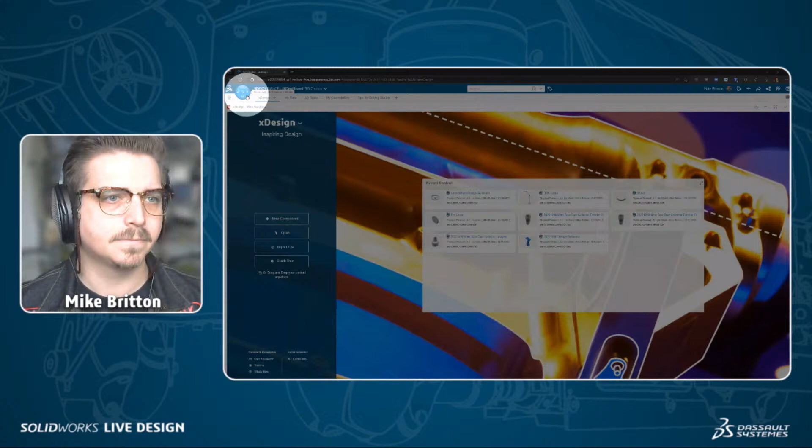I love how you started here—again, this is meant to be tool agnostic, but anytime you go to a new website, a new web portal, a new platform, you're kind of unsure of what to click on or where to start. I think these dashboard areas aren't for their own sake—they're meant to help you navigate your way around, especially if you're new to this tool.

Even that shortcut you gave to the Maker's Cloud link is a great thing to keep in mind—I always say bookmark it, so once you go there you can get back easily. Yeah, these are really good tips to start off with, just to feel more comfortable.

I'm not going to be using it too much here, but I'd be remiss if I didn't point out the giant button next to that hamburger menu. The hamburger gets you dashboards; this one gets you what we call the compass, where I have my favorite apps set up, and this is where you can go to install your desktop things.

But I'm going to be using xDesign—this is the browser-based, parametric CAD package—and I'm just going to open up a new component.

And this is pretty much like you're just making a new component, new file, right? It's all the same, just something new, file new. In this context: new component, new document, new everything. Something new that you will eventually, hopefully, hold in your hands.

And over here on the left, over on our design manager, we have our document name. It says 3D Shape 1, and I'm not going to talk about that today. If you really want to hear about it, we'll talk about it another time.

Sure. But every CAD package that I have worked with, and the number only keeps increasing somehow, despite being SolidWorks. I think you said to me the other day you've worked with like 5 or 6 different CAD packages. I think it's slightly more modest than that, only 4 or 5 3D CAD packages. Okay, 3D, all right, so you're specifying there, but it's still pretty impressive. It's enough to say, right? Like, to be serious for a second, you are worldly in terms of CAD packages. You've used a number of different ones.

Yeah, and the main thing to know is that every CAD package has 3 reference planes built in. If you think back to maybe some grade school geometry, the XY plane, just get my view normal to that. When people say something is normal, they don't mean like our neighbors or how you're supposed to act, they mean looking straight onto it. Yeah, or abnormal like I am.

So you have your XY plane here, and that's just your Y plane going vertically and your X plane going horizontally. A new one for a lot of folks is maybe the Z plane, and we can see in our reference triad again, the Z plane goes upwards in space. So X and Y are 2-dimensional and flat, Z is your third axis that gets out. And because you have a third axis, you can now create a plane across those other 2 coordinate systems, so you have your YZ and you have your XZ. And we can tilt and rotate our views and things like that.

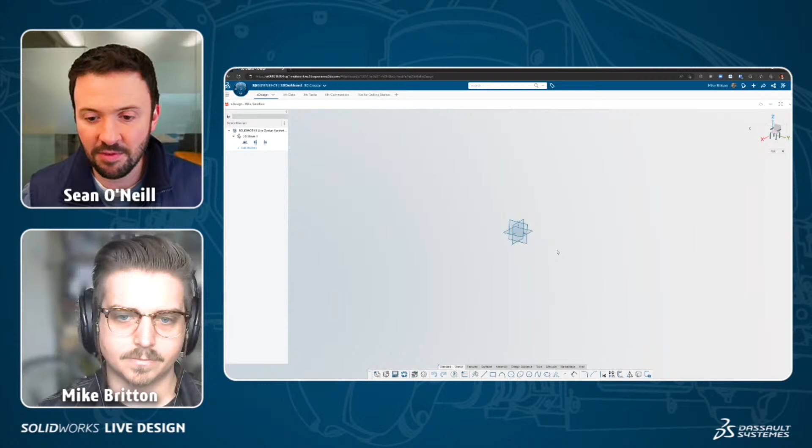Yeah, it's interesting, even different CAD packages, right? Like some will use, for example, the X apps here, I see they're using what we call a Z-up orientation. Different CAD packages might have different sort of directional axes in that way, in terms of how they're coordinated in the 3D space.

But like you're saying, the void that you kind of get thrown into whenever you open up a new file in a CAD package, right? A lot of times we're by definition working on a 2D plane, at least in terms of our devices, our screens. It's a laptop, a tablet, a phone in this case. You could do that with xDesign, but it's kind of giving you an idea of what it would be like if you were actually in that void, across the 2D plane, in that 3D space looking around. So these are all good tips, I think, for how people orient themselves.

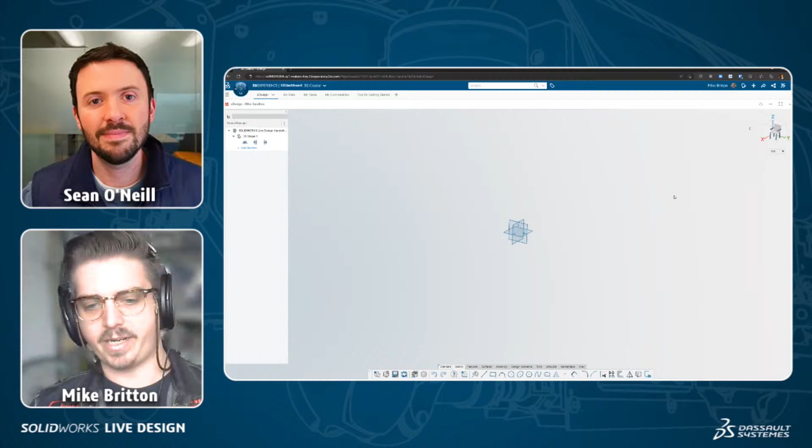Yeah, and you want to design how things are going to look. SolidWorks these days calls them your front, top, and right planes. And you mentioned that Z is up for this, and in SolidWorks, Z actually extends towards you on the screen. It treats X and Y as the sheet of paper, and that made sense in the early days of 3D CAD, where you're starting with a 2D piece of vellum on your drafting table, and that is your X and your Y in front of you. So Z comes out towards you.

So that's why maybe these days we think of X and Y just down on our desk or whatever, and our Z coming up towards our face. It's just rotated around a little differently. And people ask, why is it that way? Sometimes you make a decision in 1992, and that's how I ended up with a little brother. So that's why we have Y up for SolidWorks.

All of these planes are basically the sheets of paper I was talking about that you start with. All 3 of these planes only intersect at one point, and that is the origin.

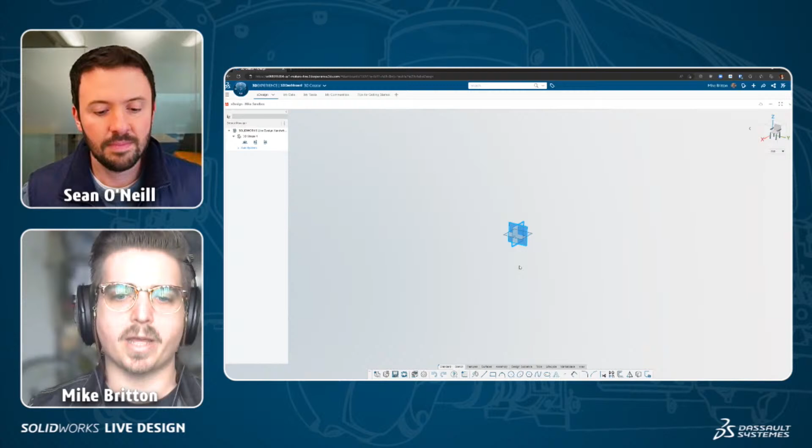If I multi-click on 2 of these planes, we can see—since these are infinite, you can't really zoom in on it—but 2 planes only intersect along an infinite axis. When you get 3 planes into the mix, that's just 3 perpendicular axes that all intersect at one point. So that's what we're going to start with.

That is your origin. That is 0, 0, 0 if you're using Cartesian coordinate systems in your CAD package, bless you. And this is just kind of how we start.

Before I get into the main bit, I want to show a quick demo of how all of this links together before we do our big thing. The part we're doing is usually on the afternoon of our first day of SolidWorks Essentials or the second day. At this point I've usually really beaten people's brains into submission with how 3D CAD works.

I'm just going to right-click one of these planes and click my new sketch icon. That is pulling my view normal to it. Now my analogy for graph paper is really starting to work out because we can see the grid. All I'm going to do is grab my rectangle tool.

Let's talk about the action bar. The action bar is where your actions live. Different CAD packages call them different things—SolidWorks calls it the command manager. It just has different tabs that different tools live on, and the big two are sketch and features.

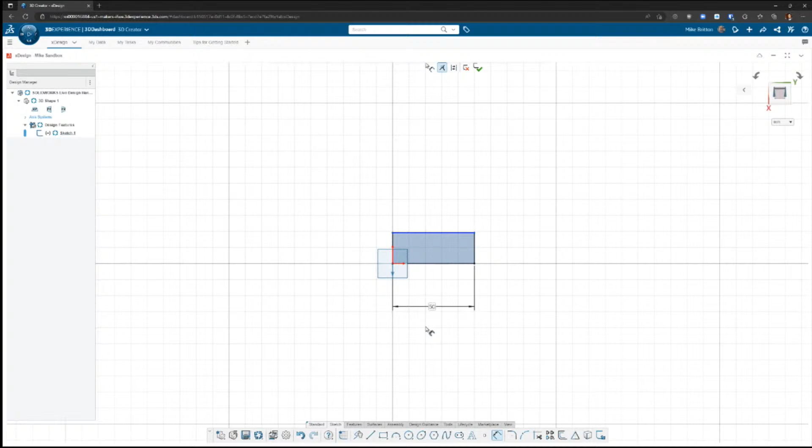Just click once to place one corner—this is set up so I can place my dimensions already, but I can do something weird like this. Then I can come in and put my dimensions on here. I can click one entity at a time, and your dimensions drive your geometry. Same for something else we'll get to later called sketch relations.

So you see that 50 millimeter dimension just kind of yanked that top line out of place. This can be really unexpected behavior for people more attuned to some 2D platforms.

There's a lot of stuff here you went over. You showed the behavior where the CAD package—in this case xDesign, but a lot of CAD packages—will try to get you to anchor to something. There's only one fixed point to anchor to, everything relative to that. But it gives you other cues too, like even the way it shows the rectangle—the only thing that's filled in, a dark blue or purplish color—indicates where it's like a closed volume.

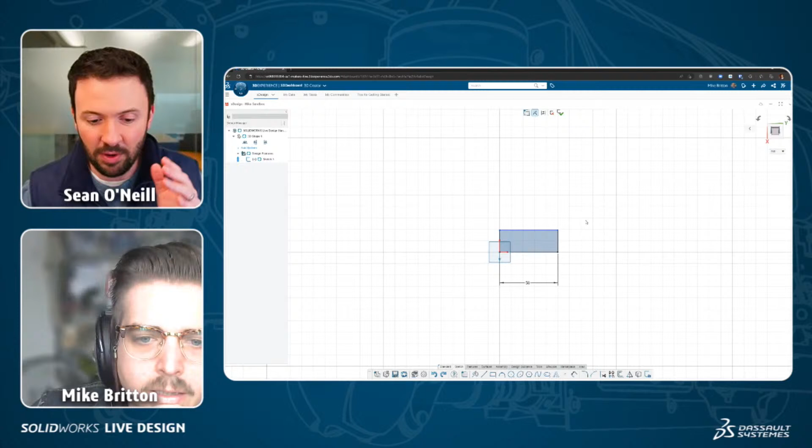But even before you did those dimensions, the rectangle did have dimensions in truth—it had a shape, it was this long and this high. So just to point out, for intro to 3D CAD, a lot of beginner users—even if you're just a beginner with xDesign but you've been using CAD for a while—notice the colors. They went from blue on a couple of these lines, and as you add the dimension, it goes from blue to black. What does that signify?

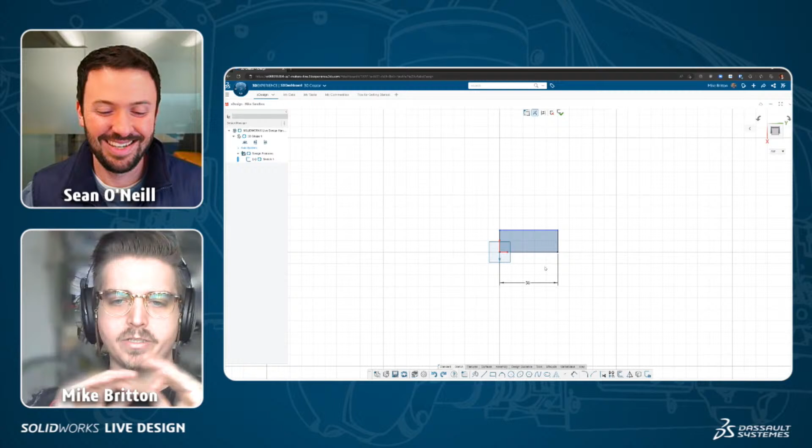That means all degrees of freedom are removed from this particular entity. If we look at these vertical lines, we can see it has a black endpoint where it starts, which means it has definition about this line, but it ends with a blue endpoint. If I click and drag this blue line up here, I can shrink or expand this indefinitely.

That means it has an unrestrained degree of freedom up and down. So if I put a dimension along this line, or a dimension from this line to this line, I can restrain that with a measurement. I'll go ahead and click this line here and give it 35 millimeters, and this is a fully defined sketch.

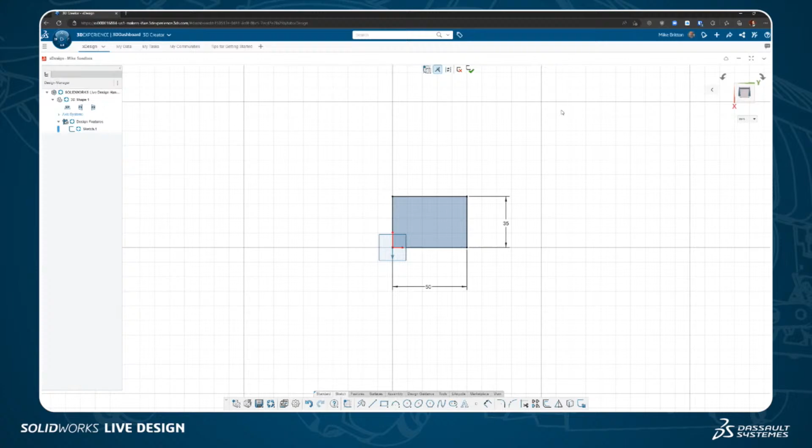All of my points and lines are black. I cannot click and drag anything, it's fixed, all degrees of freedom are removed. There are so many little context clues to look at. Especially when you're getting started, it's about knowing what to look for and which signal it's giving you.

But xDesign has some really good ones. I see my good friend Drew Buchanan saying trust the xDesign process. Definitely, I know Drew, huge xDesign fan.

I think that's also a great off ramp to show that I am doing this in xDesign on purpose, because you don't need a special computer as long as you can get on the web and generate images on a screen of some kind. Your device just needs a battery charge, maybe.

Maybe another prereq, you can use xDesign. I have used xDesign on my extremely weenie Chromebook. When I clock out, I unplug my work laptop from my dock and plug my Steam Deck in, put it into desktop mode instead of gaming mode, and I model in xDesign. I even have a little prop right here. I 3D printed this from polycarbonate on a Prusa Mini 3D printer, and this is just an adapter to get my dust extractor hooked up to my miter saw.

That was all on xDesign on my Steam Deck. So you don't need a Windows computer like SolidWorks does, you don't need a beefy GPU. You can just use what you have and start turning this into something that works for you.

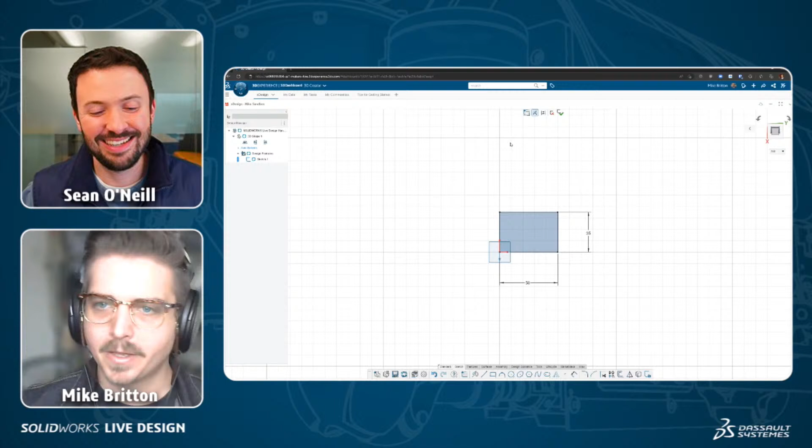All right, I think I've covered everything on this first sketch at least. There's a couple of icons up here and a similar one down here. When you start a sketch in a lot of your CAD packages, you are entering a unique design space. You are going from a 3D design space into a 2D design space, and then back into your 3D design space.

One of the challenges people most frequently run into in the Essentials class is forgetting to exit their sketch. Every package I've used that has sketches, you have to exit your sketch - that's accept sketch, confirm sketch, whatever you call it. Just get out, and now we have our rectangle.

The methodology here for all of these packages is you go sketch, feature, sketch, feature, sketch, feature. You turn your sketches into your features. So I'm going to come over to my features tab and choose this extruded feature. An extrude works the same way as the Play-Doh extruders - you put your dough in, push it through the die, and it comes out in the same shape all the way through. That's how it works.

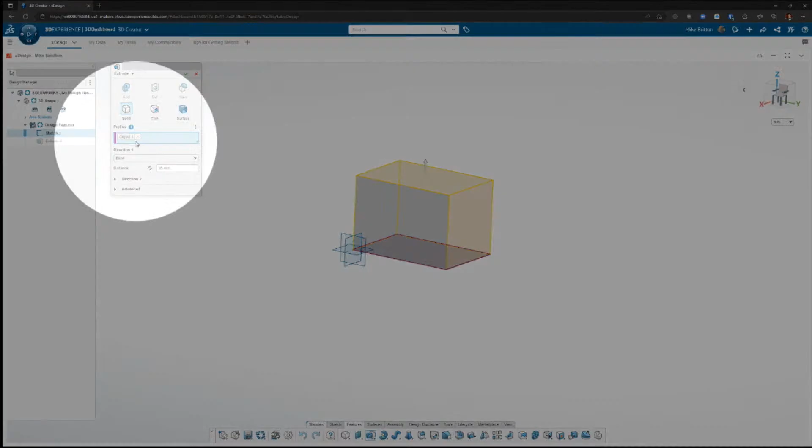I have my yellow preview here, and it's showing where this is going to extrude. We have a lot of super features and things like that I'm going to talk about that are xDesign specific, but all of these have a couple of elements to them. It pre-selected this sketch feature.

It calls it Sketch 1. If I clear that by clicking somewhere else, these blue selection boxes indicate that the software is asking me to grab something. So I'm going to grab this profile here, or I can go ahead and grab the entire sketch out of my design manager, and that'll pull it all out.

I'm figuring, like if you had a sketch like we talked about how the rectangle was filled in all blue, right? If you had multiple contours, or if you had something that wasn't closed, and you wanted to select maybe part of it or all of it and give it a thickness value, these are all different selection criteria that could help you specify what you'd like to extrude and how. So that's pretty useful.

Yeah, and something that's worth mentioning too. Let me do this part, and then I'll hop over to this. So over here we have this box called Direction 1, and this includes our end conditions.

And blind, for anything in this design software, means going up just a certain amount. So it defaults to a 35 millimeter distance for the blind. We can set it to a 50 millimeter blind end condition.

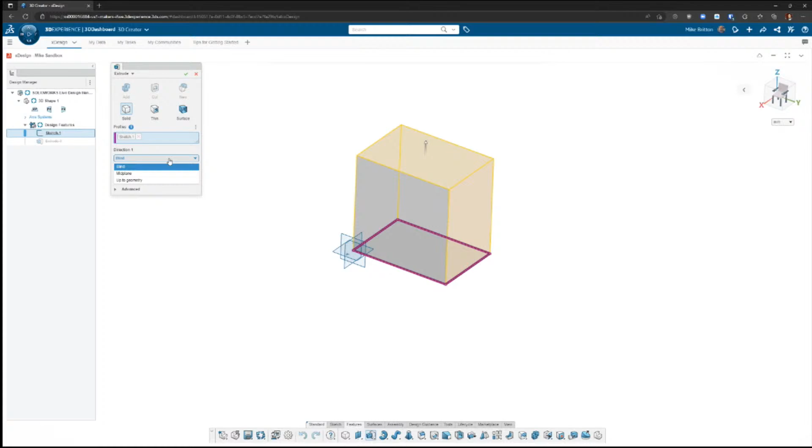We can do whatever. We're going to use a couple of these other ones later on today, but there's midplane, which symmetrically expands about your sketch plane. So if you're making a part that's symmetrical, you don't have to do it on one side then the other, or design half and then mirror it. You can start from the get-go with that.

The other one is up to geometry, and we'll be talking about that a little bit later on. But there's also Direction 2. So if I went 50 millimeters up and wanted to go 15 millimeters down, this is asymmetric. I can achieve that just by expanding my Direction 2 menu.

I'm just going to turn that off, and we get some other fun stuff that maybe you'll have me back again. Who knows? But I'm just going to...

It's interesting, so you're just getting back to the axes and the coordinates and being in 3D space, right? You're specifying, if you say midplane, then you're going in positive Z and negative Z kind of equally. Whereas if you go asymmetrically, direction 1, direction 2, you're specifying how far into negative Z, how far into positive Z you're going with the extrusion. So this is all very useful depending on what you want to do.

Yeah, so these are core fundamentals. And I started on my XY plane. You can start on any plane you want. You design the way you're going to look at and hold the thing in real life.

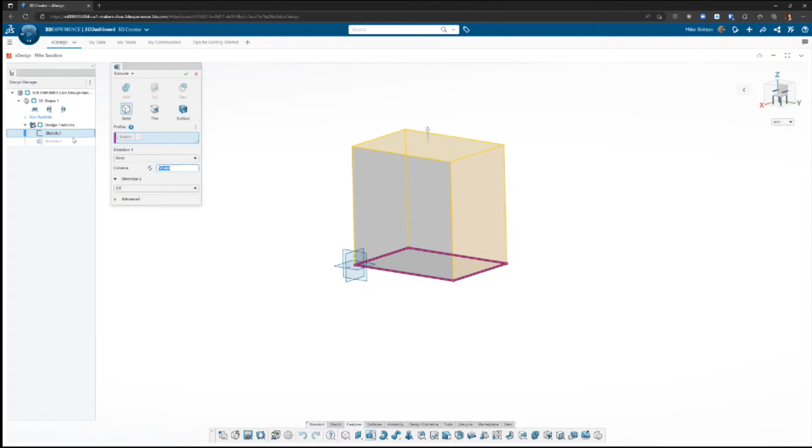So this extrusion vector is going in Z because that is normal, perpendicular, to my starting plane. If I were on YZ, it would come out along X. So that's... I'm getting in the weeds now.

But another thing that people miss is that you want to confirm your commands. This is just a preview. I need to hit my green check for this to turn into solid geometry.

So we have our first shape, and something that I see a lot of folks do when they're either coming over from a 2D CAD platform or a background where they've seen a lot of drawings, or even just Google image search, like what do blueprints look like, you get these really highly detailed views in these drawings, and people try to capture that on a single sketch. And that's a way to make your life very hard.

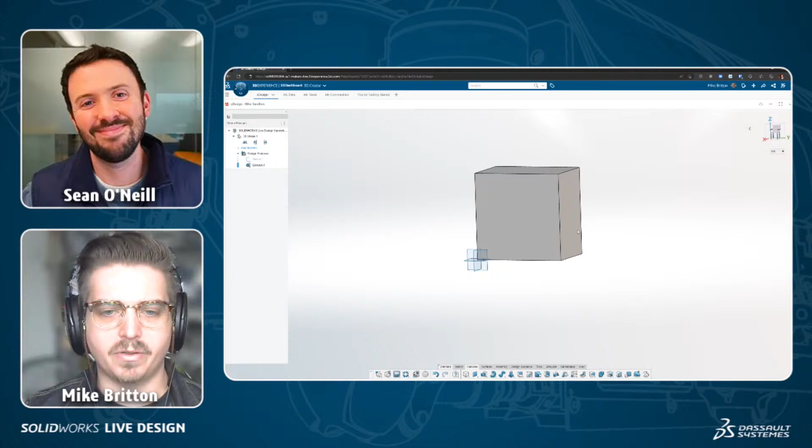One of the best things about 3D modeling is that I have created a cuboid here that is bound to these faces and planes, rather, in the origin. But now I can create a sketch on the face of this. If I just left click there and hit my new sketch in my action bar, this is no longer constrained to my reference planes. This is now constrained to the solid geometry I just made.

And I'll just do something fun. I'll offset entities, and I'll click this box here. We can see that I have a yellow preview giving me an outside offset. If I hit this reverse direction arrow, I can get it on the inside. Just do it 10 millimeters, green check. And now that is referencing this other face geometry to create something new.

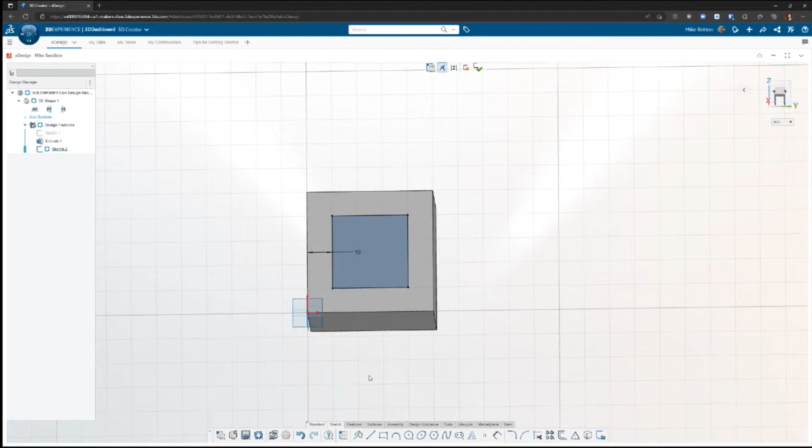So you can kind of self-reference your new geometry all the way through. It's very freeing because now I can turn this into just a little pocket on the side of this.

You hear a lot of people call SolidWorks 3D CAD, or call xDesign rules-based or parametric design. A lot of the things you've shown, whether it's anchoring to the origin point with that beginning sketch, or adding dimensions saying this line has to be 35 millimeters, or this one has to be 50 millimeters, or even doing an offset of 10 millimeters all around from the bounding edges of the face I've selected, this is all rules-based. Anything changes, that rule has to be maintained for as long as it's active.

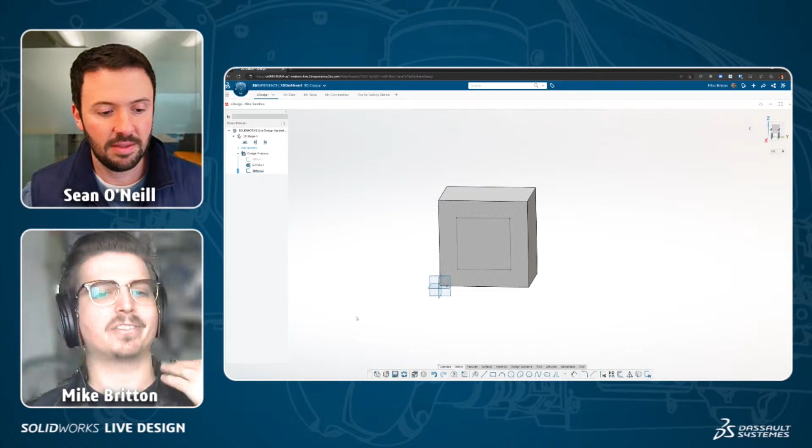So this is a really good tip at an introductory level. Just knowing that every time you create geometry, you have something new that you can reference or put something on, it gets very handy.

So I'm going to come over to my features now and click this expansion arrow on my extrude. We can see we have extrude and extrude cut. I'm going to choose extrude cut. But if I look on this menu, I could have just hit my regular extrude button and gone over to the cut. So if I hit extrude and choose this face, let's make it 10 millimeters, we can see it go out. But if I change it to a cut, these are super features.

These are unique to xDesign among our portfolio. If I choose cut, xDesign knows to flip the direction because I want to remove material. That's it, I just set my distance and green check. Now we have just a little rectangular pocket.

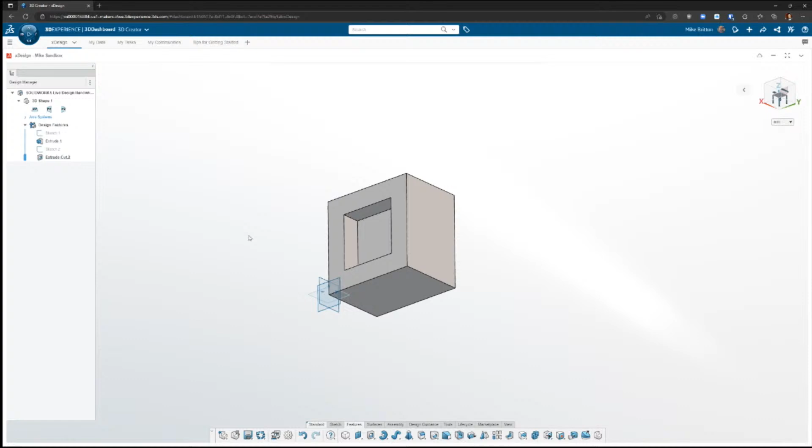So these are just some foundational understandings I want to cover before we get into the more advanced part. This is kind of a sink or swim in SolidWorks Essentials, where things start to get pretty crazy.

You've already made a nice candy holder. Yeah, just two 3D features, all done. Yeah, and this is just goofing around.

Even if I don't have something to design that day, or don't need to poke at a customer's part, every day I fire up SolidWorks or xDesign and do a fast extrude just to keep it up. I'll spend 2.5 minutes in there, sketch, extrude, and call it for the day. Because it's really important for me to keep that muscle memory. And with SolidWorks especially, if you get the muscle memory and keep it, you get extremely fast at it.

So maybe you'll see me at Model Mania World. I was gonna say there's a spot for you somewhere.

Model Mania. But all right, I'm just gonna close out of this part. It's gonna ask me to save. I'll hit save. This didn't end up being a hand wheel, so I'll create a new design that's my real hand wheel. So let's see.

Now, the platform has a bunch of built-in product lifecycle management, so doing this type of thing I see you're making great use of it. Oh yeah, someone in Waltham is having a migraine and they don't know why right now.

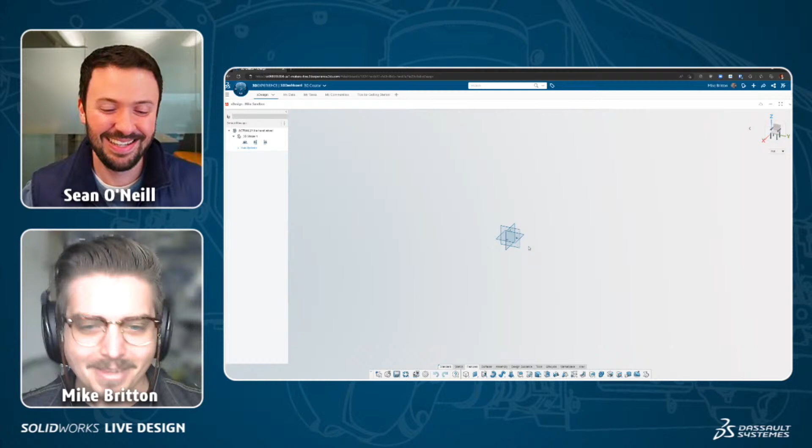All right, I'm just going to get started. We're going to start with our fundamentals, and I'm going to pre-select my YZ plane up here. I come to my sketch tab and create a new sketch.

So what we've done so far was some very simple solid geometry. I am going to start this also with a rectangle, using the same rectangle tool. I'm going to come up to the origin, and I'm already bucking the trends because I'm coming up and to the left. I'll just left click and place it there. And if you look at your cursor also...

Almost all CAD apps that I've used keep you in your tool. It's designed around you doing things in passes. So I'm going to create my rough geometry in a pass, add my sketch relations, which we'll talk about shortly, in a pass, and add my dimensions in a pass. It can be enormously frustrating for new users who don't expect that. So I hit my escape key in xDesign.

I use some other stuff in SolidWorks just to get out of my tool. The tool next to my rectangle is my arc tool. There's a lot of different arcs we can make, but I'm going to create a 3-point arc.

We can see from this icon how it anticipates you placing the clicks. I'm going to place one for the start point of my arc, another for the end point, and a third one for the zenith of my arc. I'm going to click that, and just like I can with my solid geometry, I can

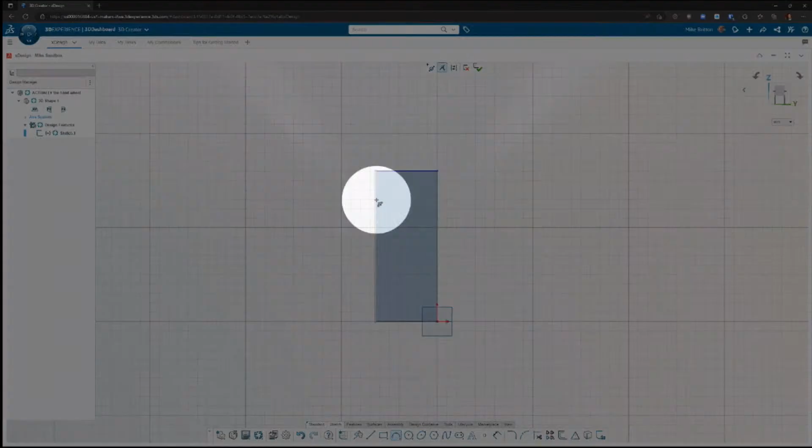get my sketch geometry to self-reference. So I'm getting a hint along my cursor with that little circle around it that this geometry is going to be coincident to—it will be on this line that I've placed. I'm going to click once to place it, click down for that other point, and left click again out here for that zenith.

So we can see that we have this big profile here that's colored in, and this guy over here did not get colored in. We're going to use another tool called Power Trim, which is either down here, or I can use something called mouse gestures—I'm just holding down my right mouse button, and I moved my mouse a little bit.

They might be called something else in xDesign, but I'm a SolidWorks guy. I'm just going to come over to my trim/extend right here, and now you can see I have a little pair of scissors next to my cursor. Hold my left click down, and as I pass through a line that intersects something else, it gets rid of that intersection.

And yeah, that's the power trim. I wish so many other programs had power trim. So essentially, it's recognizing with that fill-in now that this is a singular closed contour that can now be extruded—it's a closed 2D volume that can be made into a 3D volume of some kind.

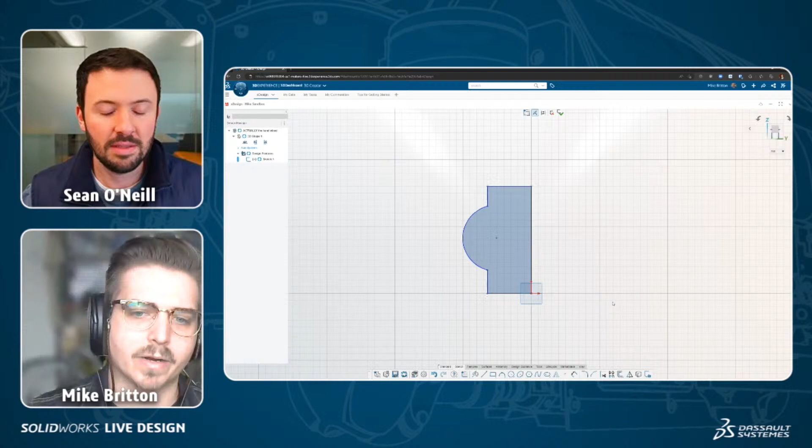Exactly—in our sketches, we are creating cross sections, and that's exactly what this is going to be. I am going to do something a little weird though, and I'm going to right click. This whole stream's about to get a little weird.

I'm just going to right click this vertical line here, and I'm going to right click and hit this top left icon, and that converts my sketch geometry from a solid line to what's called a construction line.

You can create your own reference geometry inside of your 3D space or inside of your sketches that you're not really going to be turning into a solid part. This is going to be important for a couple of reasons that we'll see shortly.

The first thing this has done is remove my closed contour—that's one behavior that's different from solid geometry. It also has some mechanically interesting elements because this is not going to get extruded like we did with our rectangles in that last part.

This is going to get revolved about a central axis. So you can think of it like a pottery wheel or a lathe—if you use lathes, it just brings the same profile all the way around a central axis.

So I'm going to come in and grab my dimensions here. Because this is going to get revolved about this central line, I can start doing some pretty interesting things with my geometry. So if I left click this vertical line here and I want to dimension it relative to this central line, I've got this dimension here.

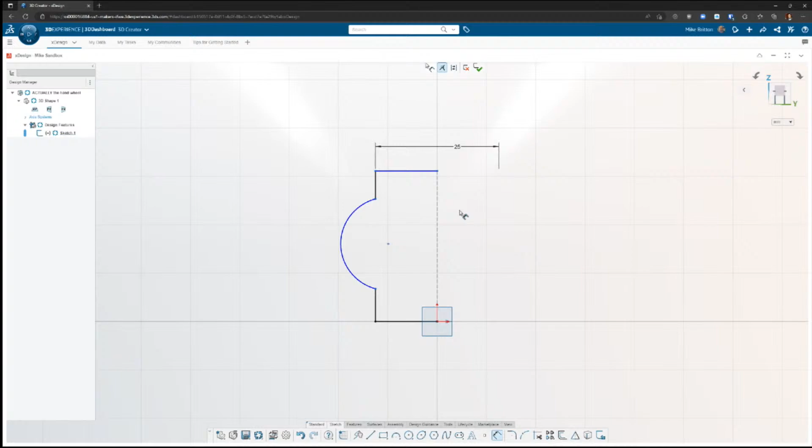Ah, cool—it's interesting. I think people are so worried to mess up sometimes when they start a new piece of software. They're worried, like, if I mess something up, then I won't be able to get back to where I was, or I just don't want to be wrong. So in this case, what seems best is just to try to make sure that your geometry is proportionally accurate about itself.

Because the software will kind of do the rest for you with that first dimension. We'll get even further along in this part, and I'll demo some of the weird stuff I do, like exaggerating in my sketches, and then letting my sketch relations and dimensions snap everything into place.

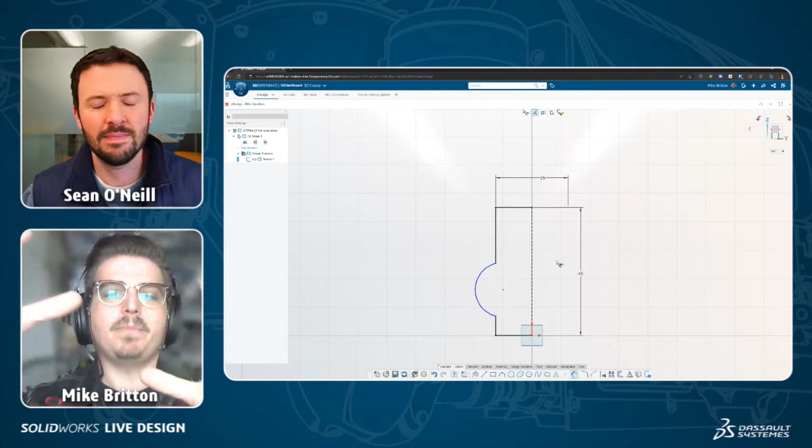We talked earlier about how when you have your cursor on something, your CAD app is grabby on there. If you try to sketch too accurately, you can end up accidentally getting relations you don't want, and then you get a lot of yellow and red on your screen. It feels like the software isn't cooperating, but really what it's trying to do is bring the rest in for you, make sure it's picture perfect. That's how I operate, and we'll see that happen soon.

I'm going to grab this upper leg here, and this guy is 10 millimeters long. We've got some weird action happening here. I'm going to do a dimension from this endpoint to this endpoint. Because I have this width figured out, this height figured out, and now this height figured out, I'm going to shrink this down just by adding a dimension, and that will pull it up for me because all of these things are already defined.

Just click to click. This guy's only 16 millimeters. We've got that. Now I'm going to grab my vertical here, hold my shift key and click this guy there. Oh, not quite what I wanted.

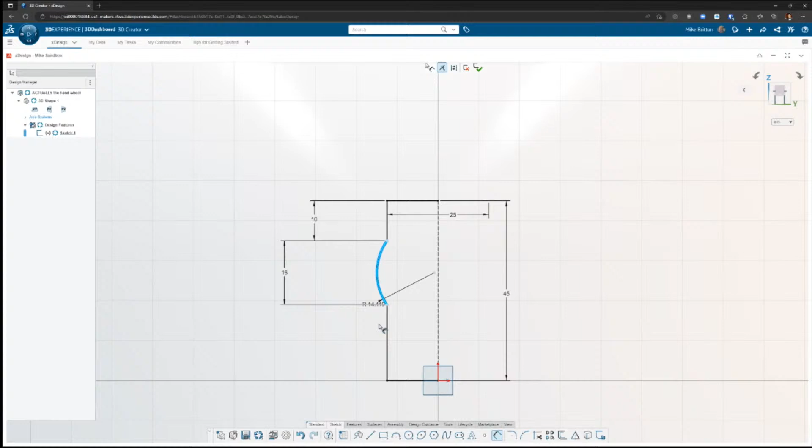How is it? Okay. There we go, I was able to—okay, check this out. I'm going to get back into my dimension tool, and when I grab this arc here—where did that even go? That's so fun, I promise you I practiced my picks and clicks. Is it?

You trying to get the outside of the arc? There we go, mentioned? Yeah, there you go. So SolidWorks, the picks and clicks are a little different, and I get on autopilot. We can see that when you dimension to an arc, it defaults to the center point, because when you're doing your shop layout, milling, turning, all that, it defaults to the center point of that arc. All I'm going to do is grab this point over here, and that gives me the distance from this outermost point to this vertical. It'll be 4 millimeters.

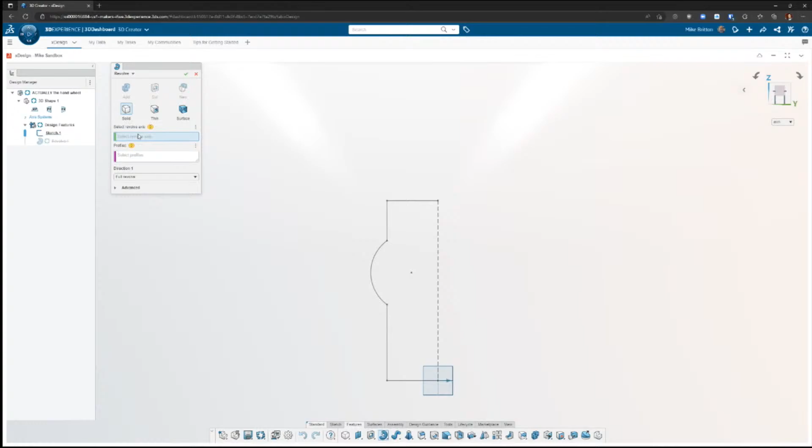Cool, and that's it for this sketch. We now have a closed contour, and I'm just going to confirm this. If I come back to my features and hit this revolved feature, it's first asking for a revolve axis, and that'll be this construction line that we did. For the profiles, I'll just click and grab all the way through here. It thinks for a second, but that's exactly what I want, so I can green check that.

Something that a lot of people—to your point earlier about people worrying about getting things wrong—if I want to adjust a dimension now that I see it solid, I can right-click the sketch, hit Edit Sketch, and change any of these, or throw in some sketch fillets here. I'll change that to 5 millimeters, and tell it to solve again.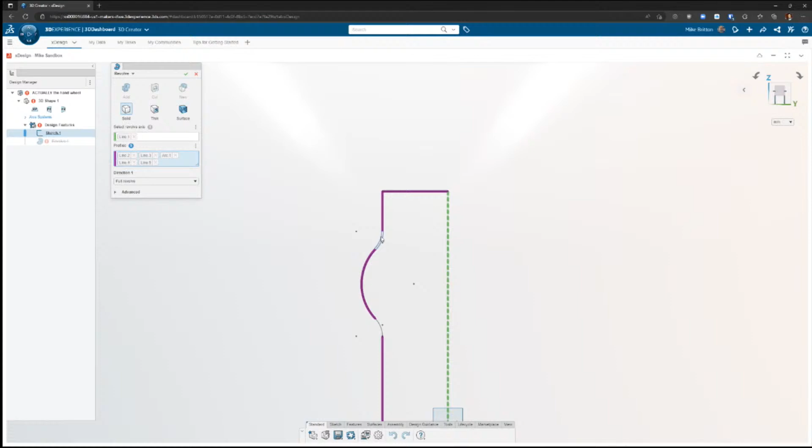I think it may have been—oh yeah, because it lost that tangency. All right, there you go. I just have to edit my revolve feature now and grab these two new little sections here, and we're back in. I like to apply fillets for that very reason, but we'll do that later.

Okay, I'm going to start picking up the pace a little bit. I'm going to create another sketch on my YZ plane.

This time, I'm going to start off with a line here, and that V for vertical gets applied to it. I'm going to convert this into an infinite construction line that is vertical here.

I'm going to come over to my straight slot tool in my sketch, and I click once for one center point, click again for the other center point, and then click a third time for the thickness there.

And I'm just going to go on a dimensioning pass. I'm going to relate this center line to the top of that solid geometry, so you can reference solid geometry inside of your sketches. 6 millimeters there. Center point of this slot, we're going to once again do our radial diametric trick for 170 millimeters.

Again, I'm going to grab my thickness here, and this is going to be, here we are. Endpoint to endpoint. Grab that.

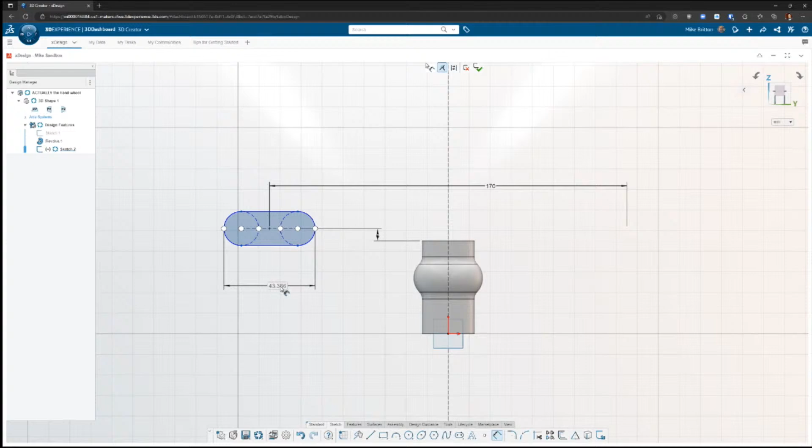That's such a cool feature. Essentially, it's just allowing you to change whether you're going to the min, max, center. That's really nice, especially for touch devices, that you can just click your dimension and get back in there to relate things.

Now, instead of getting one thick closed body here from a revolve feature, I'm going to bring this all the way around. So I can green check, come over to features, one more revolve. Choose your axis, choose your profile, 360 degrees. We're good to go.

It's starting to look like the thumbnail of the episode. Now we just got to get something from over here to over there, which is achievable.

I'm going to create yet another sketch on my YZ plane. And over in my design manager, I'm going to right-click these sketches to get them to show, because I want to relate to some of the geometry we have in here. I'm going to pop into my line tool, and I'm going to start this from this center line here that's showing up from my two sketches that I've done earlier.

I'm going to come out horizontal. What I'm going to do is go out and come back in, and I'm going to create something called a tangent arc. That means I'm creating an arc that is tangent to the line that started it, and it drops me back into my line tool. I'm going to do yet another tangent arc, then go horizontally out from there.

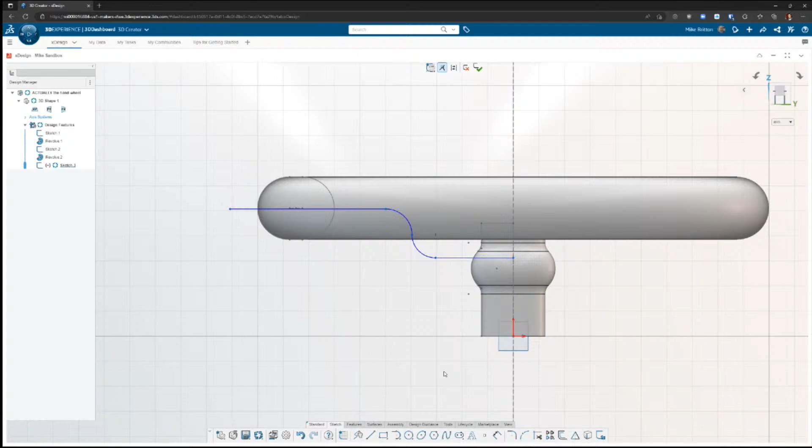So I mentioned sketch relations driving our geometry, and this is the part where that really comes in. I'm just going to move this out of the way to show what's happening here. If I come to my View tab and hit Hide Show and just hit my Sketch Relations icon, we can see that xDesign is implicitly adding a lot of relations: horizontal, tangent, tangent, tangent, horizontal.

Now what I want to do is get this endpoint coincident to this midpoint, and this center point coincident to this line, and then get a few dimensions on there. I like to do relations before I do my dimensions because things start to get a little wibbly.

If you click any of these relations, it highlights the entities that have that relation. So these two arcs are tangent. If they weren't, I could add that relation. But all I'm going to do is left click one arc, hold my control key and left click the other, release my control key, and we can see all of our different relations that we can add. So we have tangent, concentric, equal, co-radial, fixed, or added dimension. Set these to equal. Nice.

That was one of the questions in the chat, and there are a number of ways how you might want to link dimensions and where you might want to do it. But that's certainly one way. If you're going, of course, you'll dimension these soon. But essentially you're establishing through a relation, not a dimension in this case, that these two arcs should be of equal value. So that's very cool. So that answers that question.

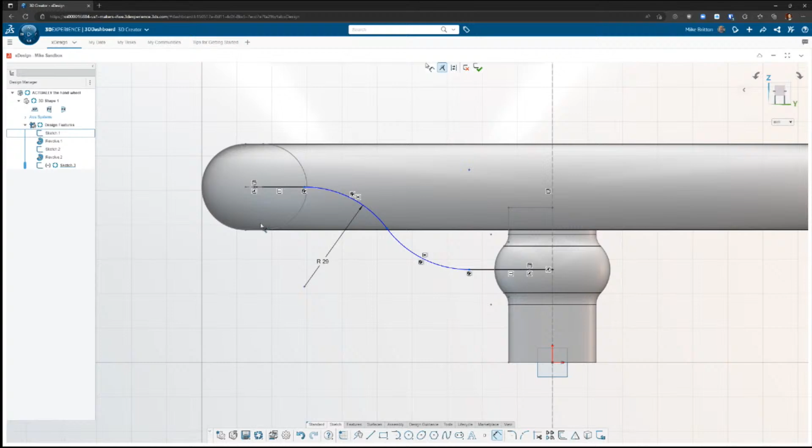Something that can be easy to lose track of is what is a leader and what is not. So it did some weird stuff, and it looked like it kicked stuff kind of all over the place. Be calm, it's okay. I'm just going to grab from that center point to the start of those arc segments, and set this to 55 millimeters.

Before we move on from this section, I really like some of the things you showed. One of the things I wanted to call out is that you're showing 2 previous profile sketches for your revolves. That's how you're getting them to look familiar, because they are. We saw them sketched, and they aren't the active sketch, they aren't editable, but they are referenceable, which I think is an important distinction. That's how you're able to get those centers of those 2 regions. I thought that was a nice utility.

And then that last dimension you added, the 55 dimension, we can see that there are different senses of a dimension. Between 2 points, you can get this horizontal dimension. It could be an angle, or the sort of straight normal dimension.

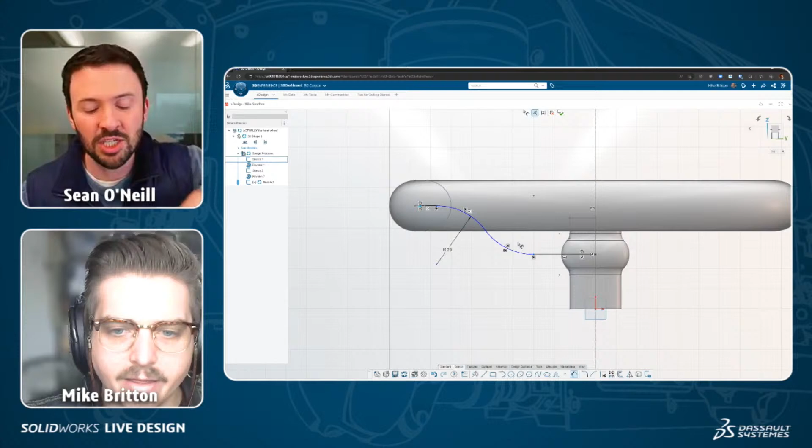Yeah, that's great, I'll get back into that. So we have our linear dimension here, just straight line to line. If I come out to the left, I can get a vertical dimension, and you can see that it goes to a lighter gray. That may be hard to come through, but that's because that is a driven dimension. The dimensions for that endpoint and the top and bottom horizontal sections are determined by other sketches already. Or if I come up, I can get my horizontal dimension.

Yeah, that's a great call out. And this sketch here is what loses the majority of my students. I swear it's not because I'm a really bad AE, it's because these can be easy to hear and hard to see, especially when you're following along click for click. I really like that this is just going to be here forever, because the majority of our viewers are probably not trying to follow click for click like you do in a classroom. You can come back and create this on your own time, anytime, with our dulcet tones guiding the way.

I'm going to confirm this sketch, and this sketch is also weird for another reason, because we're not going to turn this into solid geometry yet. We're going to combine this with another sketch.

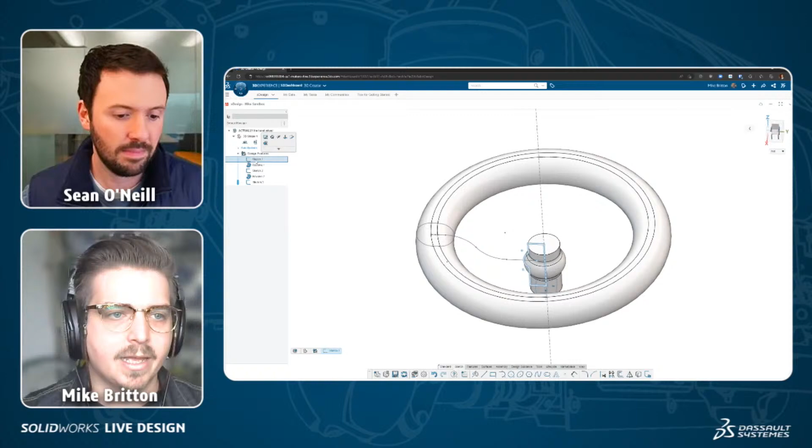One of the powerful things about linking this to the existing sketch geometry is if I come back and edit sketch, let's not do sketch 1, let's edit sketch 2. If I say, oh, this 170 millimeters is actually not great, I'm going to make this 185. I green check that. Look at that, the sketch that we just did still follows through to the established center point.

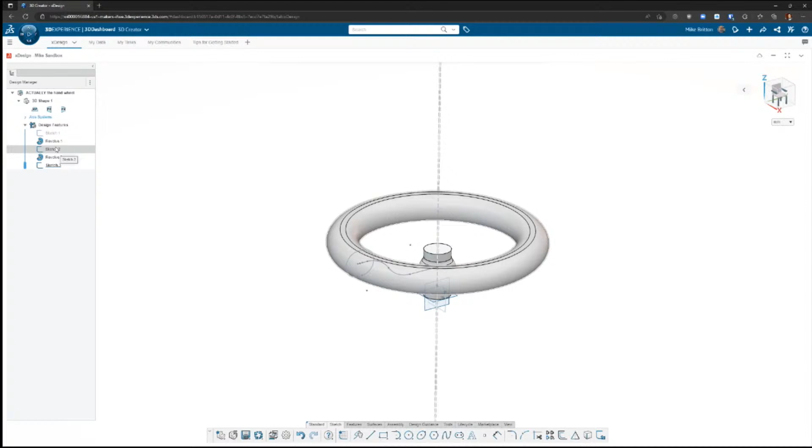And that is something that SOLIDWORKS xDesign does really well, that a lot of other 3D CAD applications are, I'll generously say, somewhat less gifted with. But with those done and those references established, I'm just going to right-click these sketches and hide those. I'll leave this guy here.

Something to note as well is that you can rename your features, which is great, because Revolve 1, Revolve 2, and all that are not very handy, especially if somebody else needs to see it. If I left-click Revolve 1, press F2, I can name this Hub. I can name this Rim.

And that'll stick through, that'll stay when I save, like I do right now. You can just view that anytime. It makes edits in the future easier. I'll open files I was working with last week and be like, what ding dong was doing this?

Yeah, terrible. I was going to say, it's good for someone else that might be editing your files, and that someone else might be you in 2 weeks. Yes, me, I'm the ding dong.

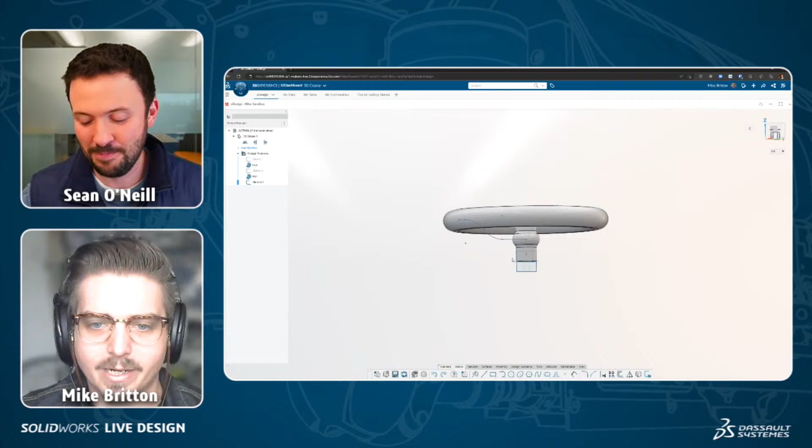Okay, so we've been doing all of our sketches so far on this YZ plane, but we're going to come around to our ZX plane. I've lived in the States my whole life, and for whatever reason, in CAD and design, it's always like my Z axis.

If that slips, say it differently. I've noticed that too. If that slips, I'm not really sorry, but at least there's an explanation. Yeah, another one of my abnormalities, I guess.

So I've left this last sketch that we did showing, and now I'm creating a sketch on my ZX plane, and I'm going to create an ellipse, using this tool here. An ellipse is kind of like a circle, but if it were Looney Tunes, if you could squash it. So I click once for my center point, and I'm going to be careful to keep that H coming along my line for my horizontal. I click my thicker axis, the major axis, and then click again for my minor axis.

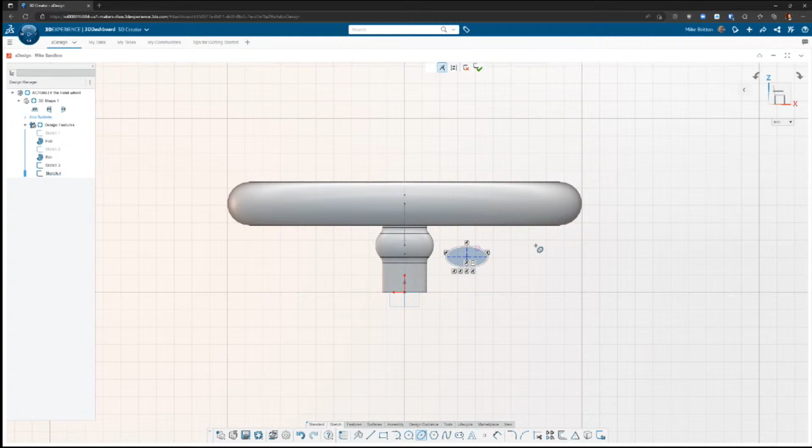This is looking a little cluttery, so I'm going to come back to my view and just turn off my sketch relations again and just trust in the xDesign process. This is what I talked about with being caricatured, because I'm going to center this profile I'm drawing here on this line, but in order to avoid accidentally clicking or referencing this edge or something I don't want to, xDesign will default to the endpoint instead of the line.

I'm doing this off to the side, and I'll get back to normal, and hit my dimension tool, and I can use these horizontal construction lines. SolidWorks 2023 Service Pack 1, I think, is getting construction lines in your ellipses, so bless — that's going to save me infinite clicks on all of my future Essentials classes. This is just 14 millimeters wide by 12 millimeters tall.

And that's it. So our sketch is underdefined, but our geometry is determined. I can't twist this, but I can place this, and I have a center point on this particular piece of geometry. I'm just going to use my middle mouse button to rotate my view very slightly, because I'm going to add a relation between the horizontal section of the line from our last sketch and the center point here.

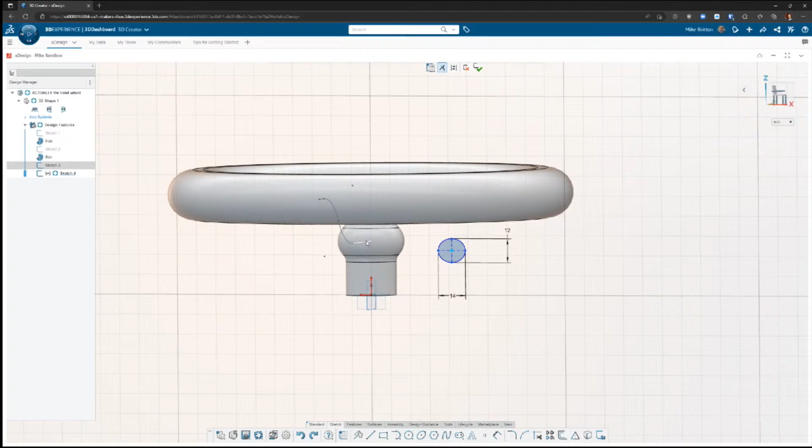The Make Pierce relation, as you saw, is a lot like coincident. So if I put a coincident relation here, it also locates that contour. For this particular feature that I'm designing for, though, I need to use this Pierce relation for reasons that are out of scope for introductory CAD. But what I'm going to do is use this profile that we've just made and this path to create a solid sweep feature.

So I'm just going to green check out of my sketch, and I'm going to hit my sweep here. The sweep, once you see these options, is kind of intuitive — it needs a path, and then it needs a profile. If I were creating train tracks, I would just create the cross section for the track, and then create one or two sketches that are just the entire circuit of that.

So my path is going to be this path here — oh, it didn't grab onto the rest of it. I'll just grab sketch 3 to save myself some trouble. We're going to be like that today. I highlighted it differently. All right, I can click 4 times, I'll live somehow.

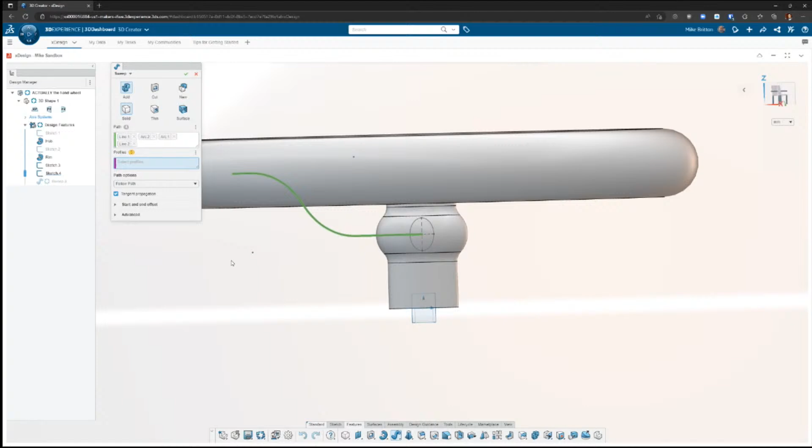And then for path, I select all of this from one sketch, and I'm going to select the profile from this other sketch, and we can see my preview and how that's bringing things along. I'm going to leave all of my options at default. If you want to hear me talk about the more advanced sweep options, you can sign up for an advanced part modeling class, or you can find me on the street, because I will talk to you about CAD.

So this is interesting. You went from having, very visibly, two bodies, two pieces of material that were disjointed, not together. And now, right, it looks like through that sweep feature you just did, you've basically joined them into what looks like one complete, almost fully assembled hand wheel, right?

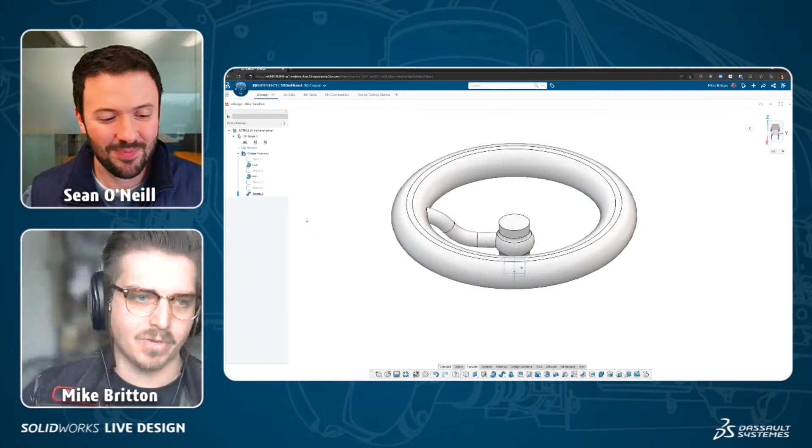Yeah, we're getting there. I don't know what this is called in xDesign, but I know that's my rollback bar in SolidWorks. You can use this if you're like, oh, I actually wanted to do something before this and edit something. You can click and drag this up to wherever you want to make those edits, and then drop it back down, and now things are stacked up.

It's kind of like your design time machine. If you wanted to do something before this, I can just bring it up. That's a direct differentiation between this type of CAD, parametric solid modeling CAD, versus sculptural stuff, like Blender. Even in Blender it can get a little hairy undoing and getting back in your design history, so that's a really important differentiation. When you create your first prototype, you don't have to create the whole part now. You can go back and edit and inject things where you need them to go.

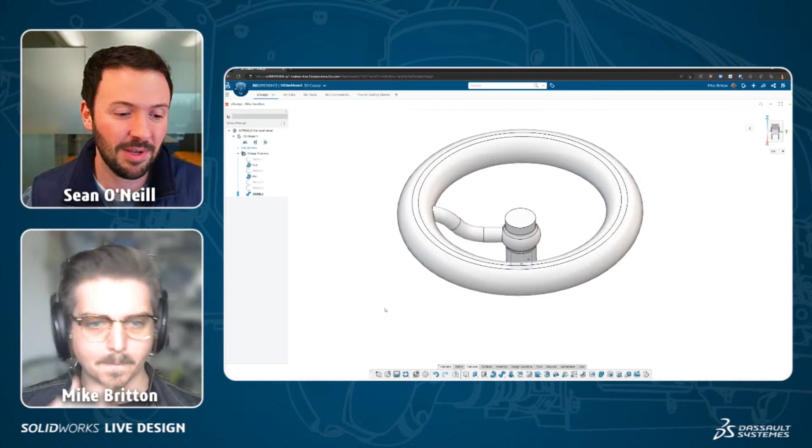We talked earlier about it being kind of funny that the last stream of the year is about these very basics, these fundamentals. The month January is named after the Roman god Janus - he has two faces on his head, one looking forward, one looking back. So it's always looking both ways, and that's why it's the first month of the year - a new start and closing up the past.

Very cool. All right, so we've got a bunch of our stuff done. If I were to actually hold this in my hand, it would be very flimsy - it would break nearly instantly. So if I'm going to create more support structures, instead of doing two kind of janky sketches and another sweep, I'm going to create a circular pattern.

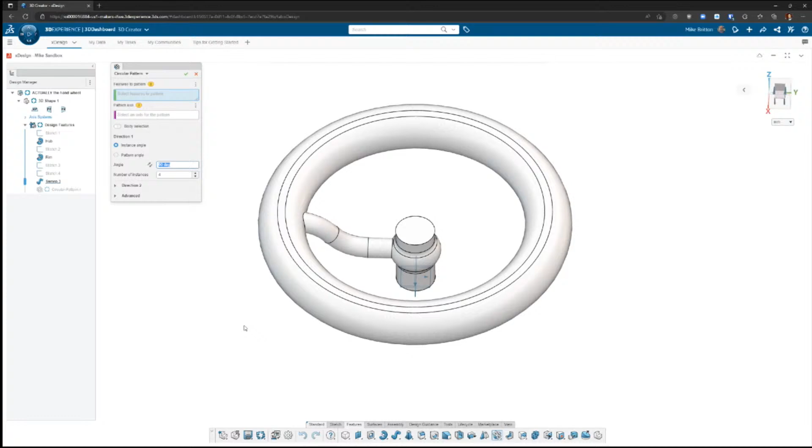So right here we have our linear pattern. If we open it up, we can see our circular pattern. Some packages call this a polar array, which I think is a very cool science fiction-y name. I'll put in an SPR for that to be renamed from circular pattern to polar array.

So it's asking for features to pattern, and there's a toggle here for bodies - let's talk about that real quick. A feature is any of the things in here. These are parametric feature-based modelers, so our geometry is secondary in the hierarchy to the features used to create it. If we chose a body selection, that is an enclosed volume - that's this whole body. If I clear that and select a feature, like this rim or this sweep we did, it's just getting that part. So your features are categorically different from your geometry, but they are related.

All I'm going to do is drop this down to 3 instances. The number of instances in xDesign and SolidWorks patterning includes the original. My pattern axis is going to be about the center. This is giving me 3 instances 90 degrees apart from each other. I'm going to do pattern angle at 360 degrees apart.

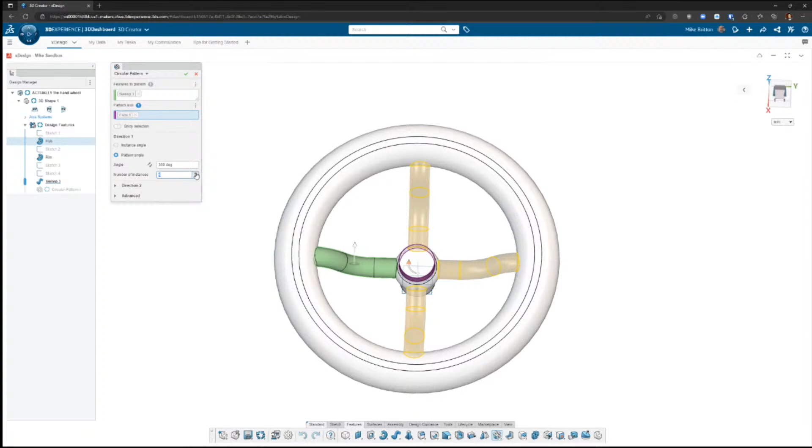So, 360 degrees total, subdivided evenly by 3. We can kind of arbitrarily increase the number. Like 7 spokes across 360 degrees is hard for you and me to do, and we'd need a dividing head in the shop to do it. But for xDesign and SolidWorks, that's a non-issue. So, 3 instances at 360 degrees, and I can green check that.

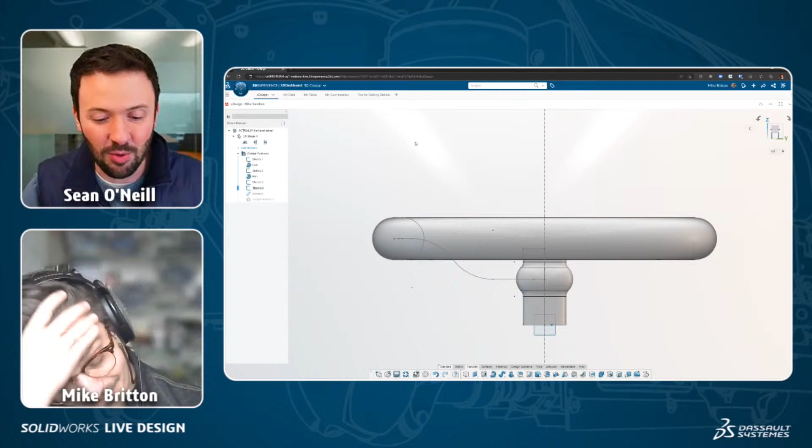And now we've got something reasonably close to our finished product. It's cool to see that all the spokes have that same quality at their beginnings and ends where they have a bit of overhang. That's one thing that comes up in CAD a lot - how do you make sure it merges properly and you don't have this weird, ugly knife face or sliver face that doesn't completely end. That was one reason, other than having those center points there, the way you made the profile for the sweep really came in handy, because it ensured it would go fully into the material of the handle portion and the hub portion respectively.

I've got a manufacturing specialty as a SolidWorks application engineer, so I already work with people doing CAM frequently on parts they're getting from customers using who knows what. I'll happily do another live design session on fixing files people send you, because again, it's a huge topic.

I started with surface modeling with Rhino 3D, and that prepared me well for editing models, because non-manifold faces isn't something in regular SolidWorks AE vocabulary. It's just not a problem anymore.

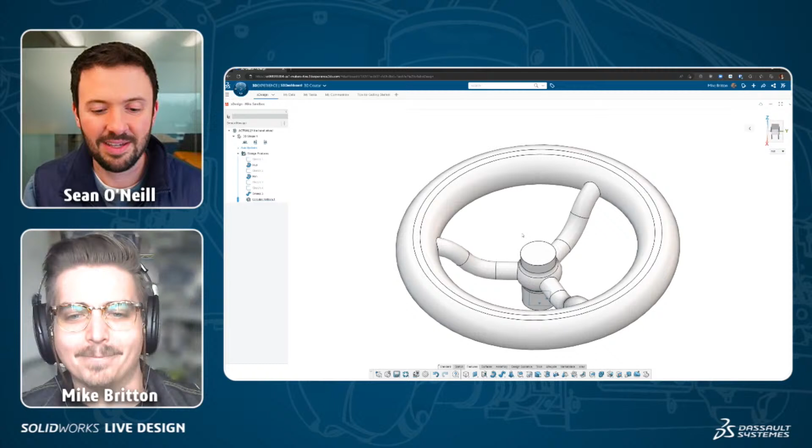Okay, so we have our spoke patterns, and I'm going to take a moment to talk about controls too, because when I first started doing CAD, it was really hard to keep track of where I was in space. I would oftentimes do things where I'd end up way out in space, totally lost. How do I get back somewhere I can look at?

My F as in Foxtrot key will zoom to fit, and that's true in both SolidWorks and xDesign. So now I'm looking at this with some orientation. It's the spacebar in SolidWorks, but the G key in xDesign to choose a face and grab your view selector. For a lot of folks, working with free orbits is challenging and not intuitive, and it does take some real work to get the hang of it.

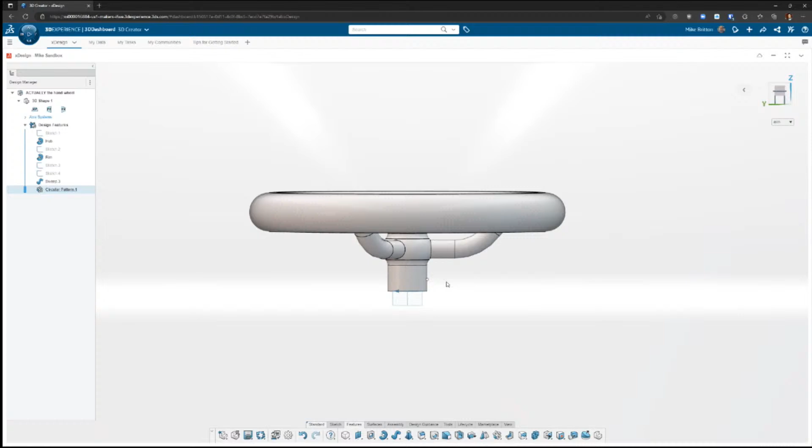Just like learning a brand new video game. So you press your G key, and now you can choose the view you want to work on. Or if I'm looking at a part and want to be normal to a particular face that's not on one of the views, I can right-click a face and hit this icon here, my normal to, and that'll bring me right to it.

So those are handy controls, and you don't really even need a mouse to do this. I'm using a stylus on my Chromebook when I'm designing there, or on a tablet. So if you're stuck with a trackpad, you can still work with xDesign - it's really not going to leave you hanging on that front.

All right, we've done that fun stuff, and we're nearing finishing touches. I have a handful of fillets I'm going to put in here, so let's grab my fillet tool. We've talked about how your workflow is sketch, feature, sketch, feature, sketch, feature - that's true for sketched features. The circular pattern, fillets, another one called shell, things like that - these are applied features. You're still inputting parameters, but you don't need a sketch to do them, more or less.

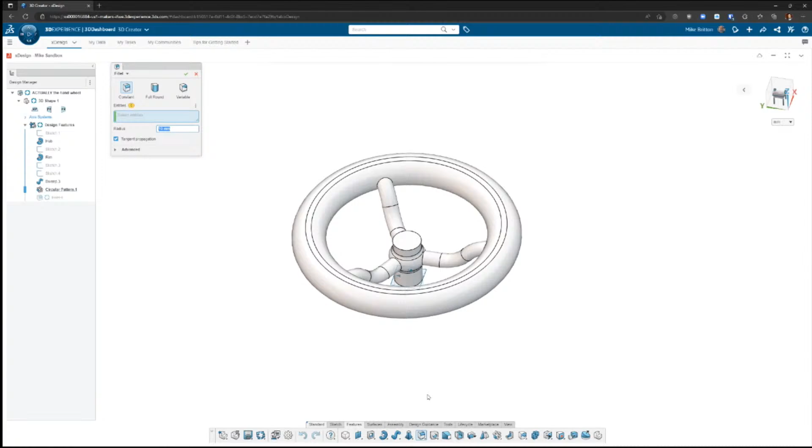So I have my fillet dialog box shown up here. I'm going to grab this edge here, and it's giving me 0.85 millimeters. That's not quite what I want - I'm going to grab 3 millimeters. There we go, and we can see kind of how fillets work.

And I could even grab this gumball here to arbitrarily click and expand to, one of my favorite games is to see how big of a fillet I can generate here. Don't let the preview go away. Yeah, we can almost get an inch on this.

And it's cool too that the way the edge was created in 3D, it sort of splits it down the middle. But since you have tangent propagation checked by default, it kind of knows to go along the other side of that. Nope, that way madness lies. I'll get too far into the weeds if I start talking about split cylindrical faces.

I'm going to clear this option out here though, and here we go. In xDesign and SolidWorks, we get some selection managers. This is design assistance for selection here. I'm going to click that, and we're going to see what this gives me. We've got a couple of suggestions involved here.

Here we go, we can see the faces that it's giving me. So it's giving me some of those, but it's not giving me the ones I'm looking for. You can fool around with these, and we can select that and add those.

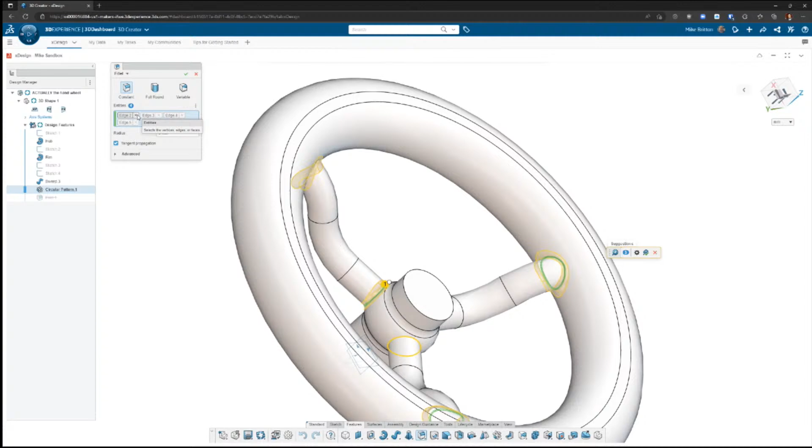But the idea, right, is you went in there with the motive of trying to speed up your processes. And I guess if I'm watching this, I might be thinking, okay, there are 3, and it's easy enough to rotate, but sometimes there are far more than 3.

So if the system can automate, and you don't have to go with its selection if you don't like it or if it isn't exactly according to your intent -- but a lot of times, even if it doesn't get each one, it may speed up your process, and then maybe you have to get 1 or 2 extra ones. At least it saved you maybe 15, 20 clicks. So it's a good thing to be aware of, and it's right next to your cursor.

Yeah, especially when you're designing for things like additive manufacturing and casting, and there's a lot of fillets you have to start applying, things get weird.

The logic behind the way xDesign does it and SolidWorks does it are a little different. In SolidWorks, you click one and then go to another. But if I click that guy, and then I click this one here, and then hit my suggestions, it usually starts pulling in even more options. Let's see what all -- it's not grabbing them here. Who said machines should learn?

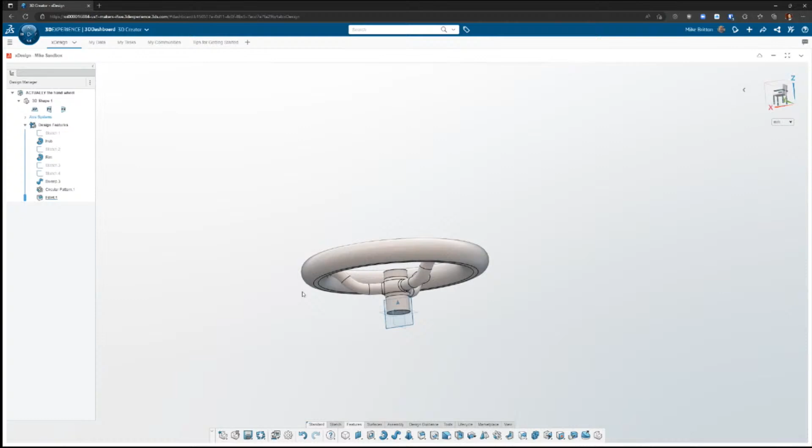All right, we've got our clicks in here, and that's going to have them all applied. Cool, so we have our fillets applied. And last, we're going to apply a chamfer.

A chamfer serves a lot of the same purposes as fillets for those of you who are new to things. A fillet is a rounded corner, a chamfer is just like a clean edge break. They're by the same icon down here, choose chamfer. Also, if you come up here and use your drop down, you can go back and forth between fillet and chamfer. Oh cool. Yeah, and we have a lot of different kinds.

The default is a 45-degree chamfer angle because that's really easy to set up in a machine shop. But we can also do distance. If you remember your grade school slope calculations, y equals mx plus b, it's programmed deep inside. You have your rise divided by your run. Your run is your x-axis, your rise is your y-axis.

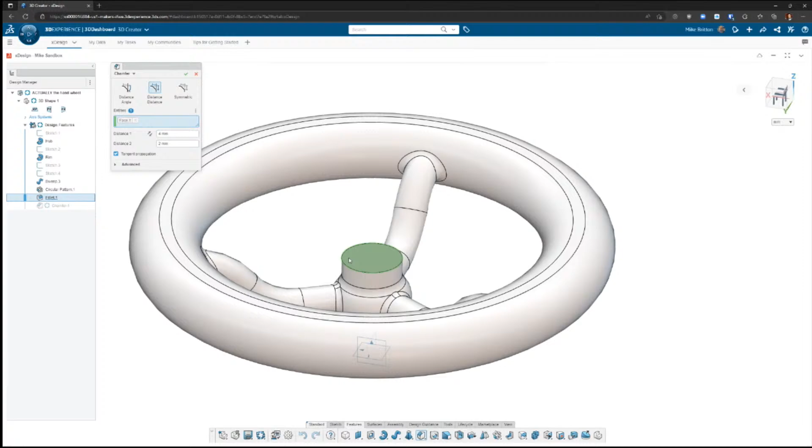So my run here is going to be 4 millimeters, and my rise is going to be 2 millimeters. I'm going to apply it to this face here, and we can see how that applies. So if it were symmetrical at 2 millimeters it would look like that, but we're going to do it a little off-center, give it a slope. And there we go, cool.

We have our fillet there, or our chamfer there, rather. Nice, yeah, how are we doing on time? Because I can just save this and hop over to the one that I sent you earlier that I ran those results on.

We're about 16 minutes over an hour. I mean, but I think with the scope of the course, and the helpfulness, especially long term, whether you're getting into xDesign or, like you've mentioned several times Mike, if it's your first time getting into parametric sketch based 3D CAD -- even if it's an hour and a half, I think that's a great use of an hour and a half. Great, for sure.

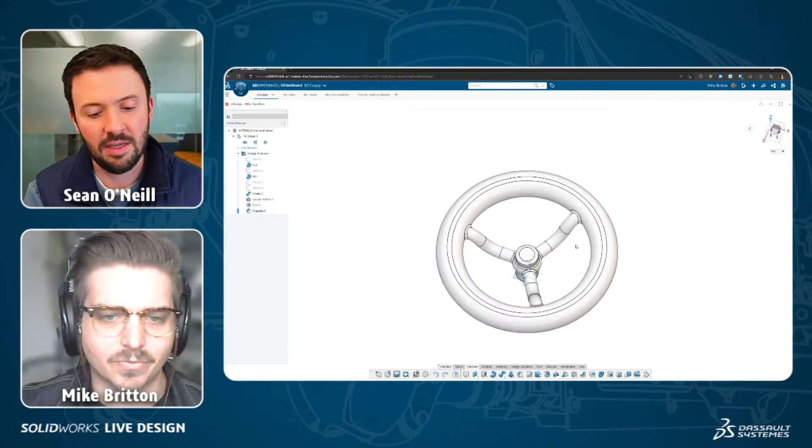Because this is where it starts to get really nice. If these hand wheels frequently need extra leverage, how could I ever get a cheater bar onto this wheel if it gets really stuck? So I'm going to create a sketch on this tiny flat face that we created with our chamfer. I'm going to right click and hit my new sketch button, and it draws me in normal to it.

I hit my C button for my circle. I can come down here for it, but I'm just going to place the endpoint of this circle. Actually, I'm going to do a line instead - a construction line first, so I can be really fancy. I'm going to do it from one edge there, get out of the way, horizontally, there we go, to this other edge next to it.

I'm going to right click, turn that into construction geometry, and constrain this horizontally to my origin for what I assure you are very good reasons. Sometimes coincidence acts a little funny - great, it acted funny in the way that I needed it to. Coincidence is like two things touching, but it can also be two things not touching, like sharing an axis or sharing a face.

It's kind of getting back to how you can see a line - what is the definition of a line? They would intersect if the line continued, right? So it's a good thing to bring up, and I also really like what you're doing.

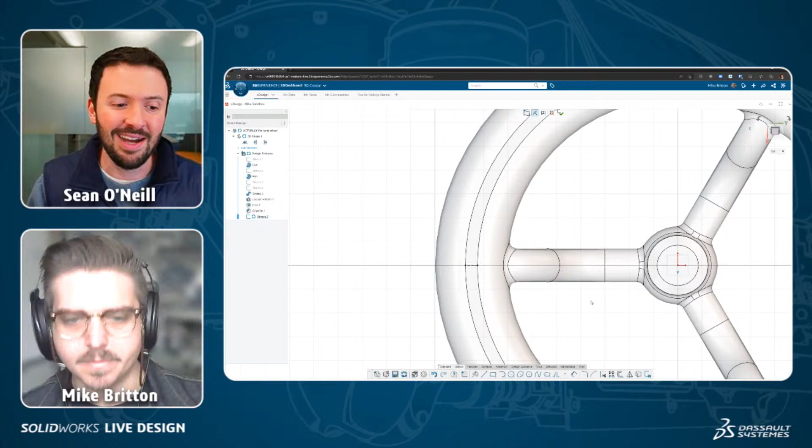I think that's a great tip. Yeah, I'm very big on making my own construction geometry. Yeah, me too. Obviously, whenever I touch a customer's part - if you use more construction geometry than I do, you're impairing yourself, or if you don't use as much as I do, you're clearly unsophisticated. It's only the amount that I do that's right.

But construction geometry is so useful because sometimes if the powers that be make edits up our design manager or feature tree, sometimes if you make a big enough change, it can lose those things. That's just kind of about how SolidWorks keeps track of where everything is, or xDesign keeps track of where everything is. So frequently adding construction geometry can make errors or warnings that show up later a little bit easier to manage, because you have one degree less abstraction of what you've got and what you're trying to fix.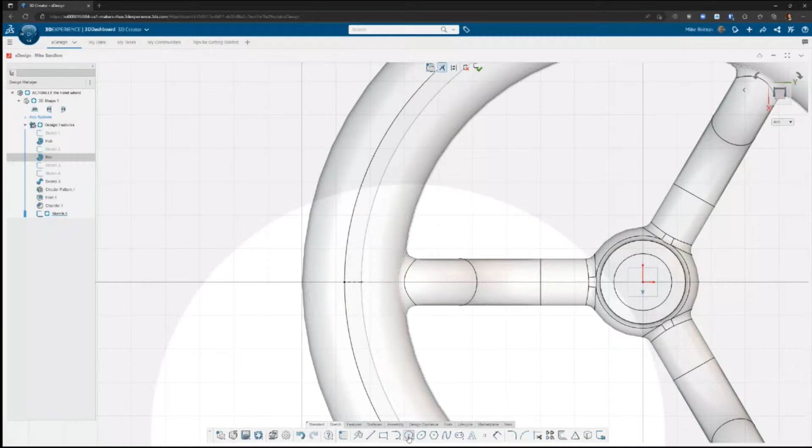All right, so we have our center line here. I'm going to go ahead and create a center diameter circle. Because this is a really tiny line, I tell my students all the time that I use SolidWorks like a grandma because I'm zoomed way in there. Especially on small stuff like this, I'm going to hover over this line, and we can see on my cursor feedback that I have a circle around it now for coincident.

But as I get towards the middle, that'll transform into a triangle, and that triangle in xDesign means it is the midpoint. SolidWorks behaves a little bit differently - it shows you an explicit point. In xDesign, you've got to kind of uncover it. But once you've got it, I can click there, and now with this dimension showing, I'll just type 20 millimeters. My sketch is fully constrained. I can confirm my sketch.

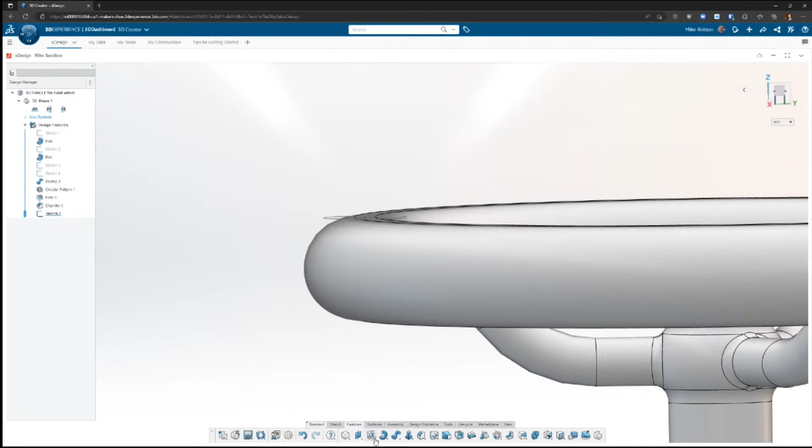So I want to extrude this up, but if we take a look at our sketch here, we can see that it overhangs the circular edges of this rim. So I don't just need to extrude this up, I need to extrude this down as well. So I'm going to come back to our extrude, grab this profile here - let's see, this guy comes up, how far do you come up?

6 millimeters. But then on the downside, I'm going to do something different. So we're going up 6 millimeters, and then in direction 2, I'm instead going to use up to geometry, or actually I'll use up to next. And you'll see that it's going all the way through this body here.

Since this sketch is set as up-to-next, no matter what changes I make, because it's constrained to the center of that rim, if I make it wider, the sketch will follow. If I make this rim taller, the end condition will follow too. That ensures I don't get any of those tiny slivers.

There we go, it stays right. You're future-proofing it so that if the shapes change in any way, it still works — you still have enough overhang to merge the extrusions together.

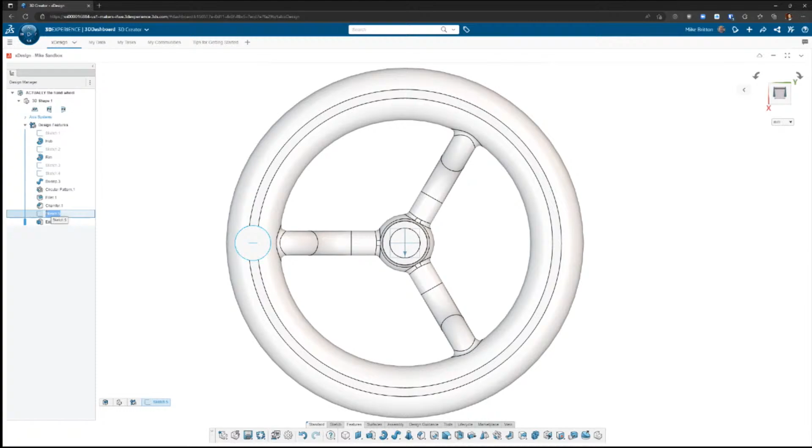Yeah, and this is about maintaining design intent, which is such a hard concept to convey. For this knob, there are a lot of ways I could place it in space. I could place the center point 85 millimeters from the origin, and that would happen to land on top of my rim, but it wouldn't follow any edits. What's important is that this knob is on top of the rim, period — it has to relate to that rim.

And that's just something that once you get it, you've got it. It's hard, and you can hint at little things here and there, but if you abstract it away from CAD, it's just setting the proper rules.

No, I think that's the geometric example of that — a really good point. That's a great way to explain it, I'm going to take that into class because I don't have kids, so that was never going to come up for me. Never going to come up.

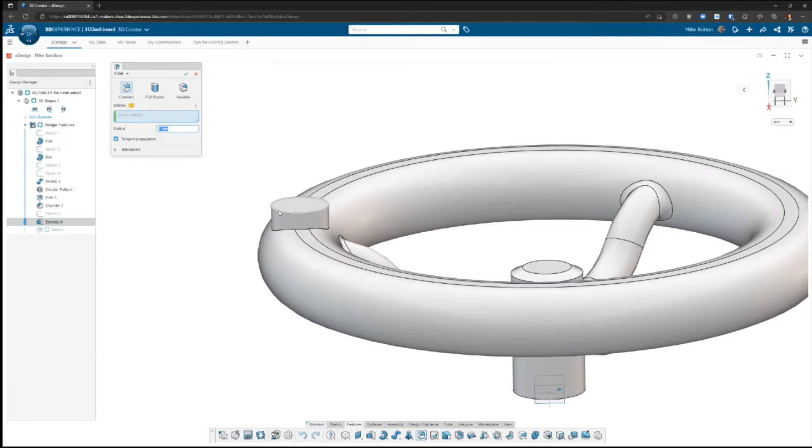I just changed my radius to 1 millimeter. I can choose an edge to fillet and it goes all the way around, or I can choose an entire face to fillet, and that fillets every edge on that face — that can save you a lot of clicks. I didn't do that earlier because I didn't want xDesign to try and add a fillet there. All right, we've got our final two elements here.

I'm going to create one more sketch on this part to make a hole so you can actually attach stuff. This is going to be a 9 millimeter hole. I'll hit the C key, and if I hover on a circular edge, you can see it has woken up my circle center point.

So boom, we're fully defined in there. I can green check, press S for shortcut, hit cut, and grab that profile. Because the important thing is that it goes all the way through, I'm going to set my end condition to through-all one way. That just makes it go through the entire bounding box of your part.

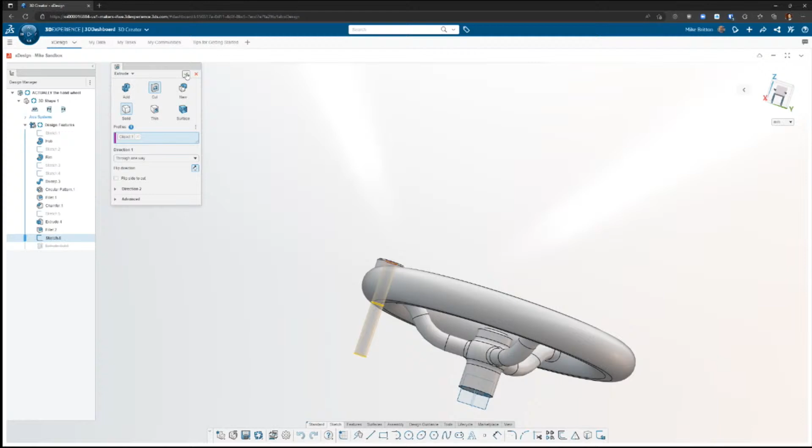So be careful when you want to use that — there's nothing underneath in this case, but if there was, you'd need to be careful. The last thing I'm going to do is create another sketch down here so we can actually get the part on something. I'm going to create a circle.

And tragically, I prefer to design in millimeters. We could change that anytime over here, but that changes for the whole document. If you, like me, also design in metric, because I don't need drill sizes with letters on them...

I can mix and match my units. This is going to mount to a 1/2-inch shaft with a D hole or D grind on it, so I'm going to set this to 0.5 IN. That gives me 12.7 millimeters. Oh, that's a good tip. It does the conversion for you for that dimension.

Oh, yeah. And if anyone ever gives you guff, imperial is based off of metric. We didn't know how big an inch was until World War II.

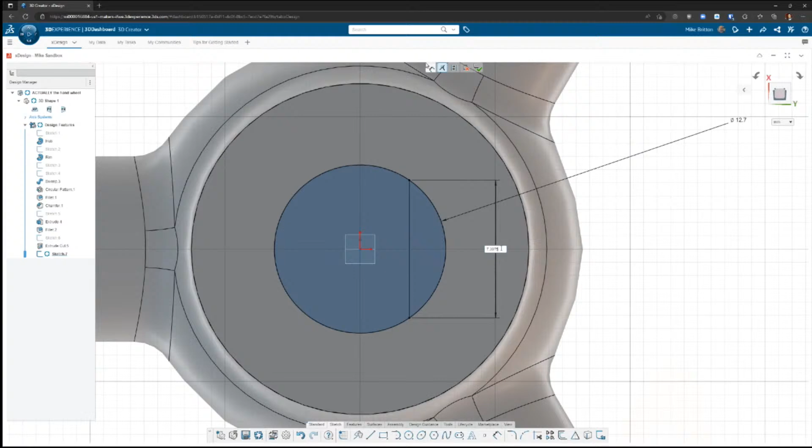So, all right, I put another line inside of here to give me my D size, or my D geometry. And if I just left click that, I can make that vertical, which is what I want. And I'll also throw a dimension on there. This is some inch to metric conversion that I couldn't find. 7.3975. I wasn't invested enough to find it.

Then I'm going to get back into my power trim, come through there, and I'm just going to confirm my sketch. I'll do another extrude. Using super features, I can make it a cut again, and it gets cut into a 1/2-inch depth. So I can just type once again, 0.5 IN, and it's in there.

Awesome. And that's it. That's the part. That's our hand wheel. There we go.

So the other thing that I wanted to show is something called design guidance, and it's a little time consuming because it takes a lot of electrons and silicon and such to do.

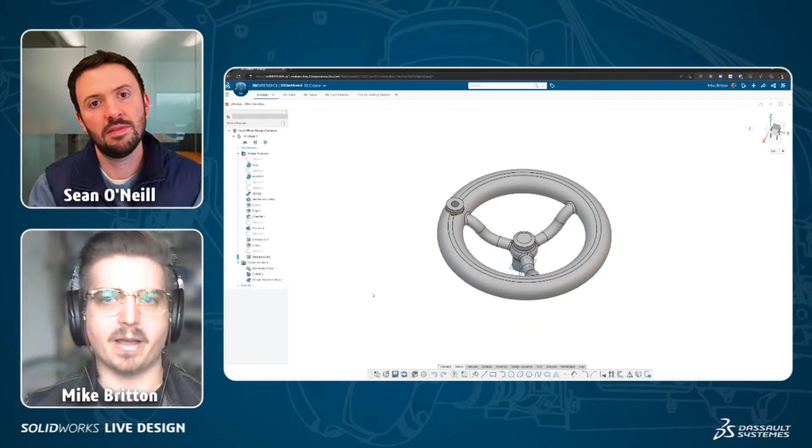But through the power of movie magic, I already made this part earlier in my sandbox, and I just want to talk about this. A lot of times, this is strictly part of a subset of our computer-aided engineering called simulation. I'm a machinist at heart, I don't run a lot of simulations. When in doubt, make it stout, that's my guiding principle. But simulations can do some really cool stuff, and that specifically is design validation.

SolidWorks Premium comes with Simulation Express, which you can use, and that'll spit out a factor of safety and things like that. But if you just kind of want to see how all of this works, you can pull your SolidWorks geometry into xDesign to run this design guidance.

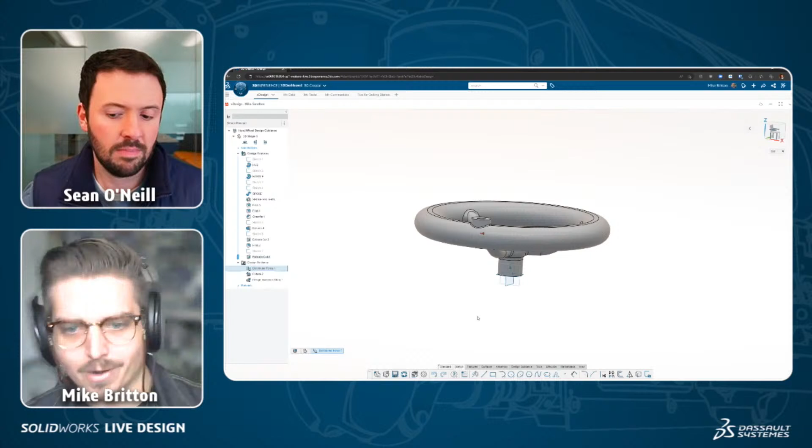The way it works is that you choose a force, and you can choose a force or a pressure. A force is just like a whap. A pressure is everywhere all at once. And then you choose a fixture, something that is not moving relative to the force, that would move in line with the force, or is attached to another system, or is where your rivets go, what have you.

You can make a design guidance study. And I set this to a redesign to make sure that this can stand up to the particular loads. I applied a specific material to it. This is a casting material that I don't know too much about, and there's a lot of stuff in there.

To get all of these faces, I just did a box select, clicked and dragged my mouse over the whole geometry, important tip. And we get a lot of info in here. Symmetry is a big one, because you can say, hey, my part is symmetric about this plane, so only compute whether or not it can manage the force that we set up here. It's going to look the same on both sides.

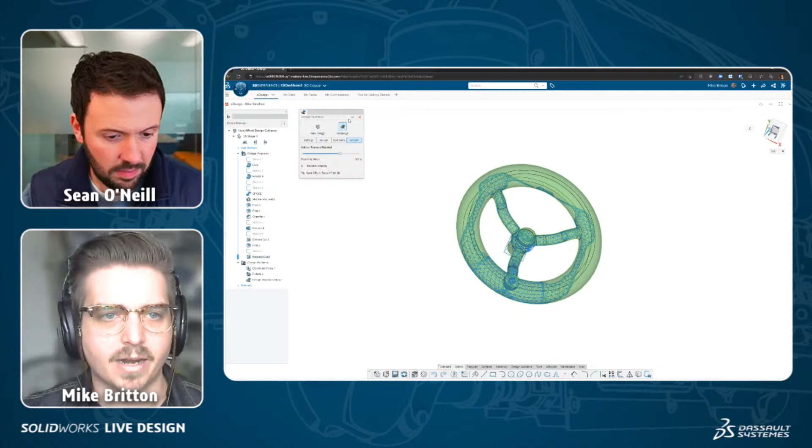And then we can get some info, you can export these results and do a lot of things like that. But what I want to—I was afraid for a moment that it was going to start going. If I hide my geometry by hiding the final feature... come on, buddy, you're not.

Okay, you should be showing. Why is it not? Maybe it could be a Zoom thing, or a Skype thing rather. But we can see that it has given me this very large mesh. Let's see, maybe that's a display option. Here we go, results display.

That sounds computationally expensive. But what this lets you do is if I just multi-click, when it spits out this mesh that it gives you, one, you can 3D print it directly if you want, which is cool because that looks super rad.

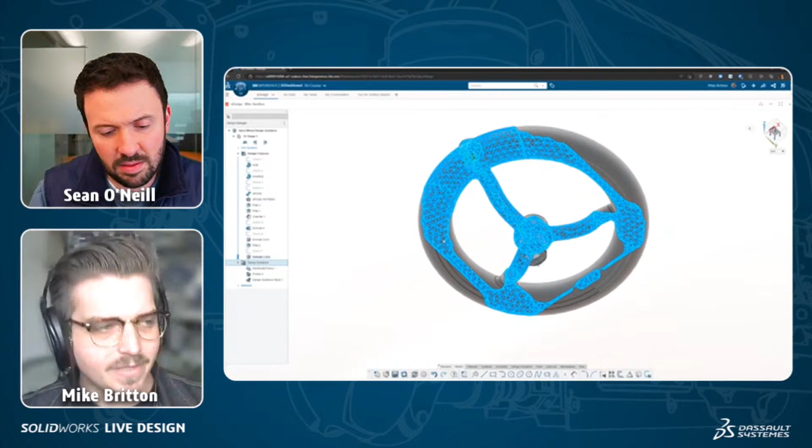But two, if your design guidance gives you a mesh larger than the part you've designed, you need to build a thicker part. You can see the simulation grow the geometry as it goes along. You have to tell it - if it gives you something bigger than that for your estimated force, make it thicker.

If it gives you something that is thinner than your geometry, that means you can take stuff away. So for instance, on these spoke rims, I could peel away some of this if I wanted to, but that means I would have to redesign my seed feature over here, and I can't get away with that there.

So you mentioned design guidance, right? We're at an hour and a half. This was intro to 3D CAD, right? You've shown a lot of really good tips to that extent. But like you said at the very beginning, it's you want to make sure that what you're building can actually work for the conditions that it's likely to be faced with in the real world.

And looking at your mesh, right? Where did you put the force? So the force is on this little hole here. Okay, and the fixture is this D hole here. And it stands to reason, right?

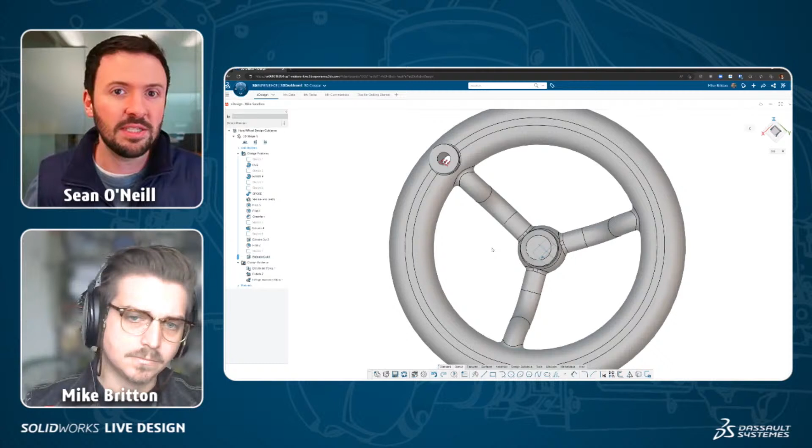You can add symmetry conditions, so you're basically specifying computationally that you can only worry about maybe half of this, so it takes less time to give you the results and the resultant mesh from your study. But it makes sense - if you show the resultant mesh again, it's a lot beefier in the area much closer to that cylindrical face, because if the force is being applied directly there, you're going to need more material there so it's not breaking, given the properties of the material and the geometry.

But this is a really, really good tool, right? A lot of times you think about CAD, it's like, okay, I'm making 3D shapes, but to have it right there in a tab - there are videos on YouTube showing sample studies, more pick and click type stuff for design guidance - but just the awareness that it's there, and once you have your sort of idea of what the shape is, to be able to run that study from within a tab in the same app is very valuable.

And this falls into a domain called generative design. I've actually got a part that I did design with generative design. This is nice, fun and funny. This was 3D printed on an SLS 3D printer - a selective laser sintering printer.

And I did a lot of light weighting - this just captures cards that come out of an ID card printer. There was a supply shortage, and we had a machine locally. It was just like, okay, how do we minimize the amount of material that we need? And it spit out a mesh like this, and everywhere that there wasn't a mesh, I knew I could put holes in there.

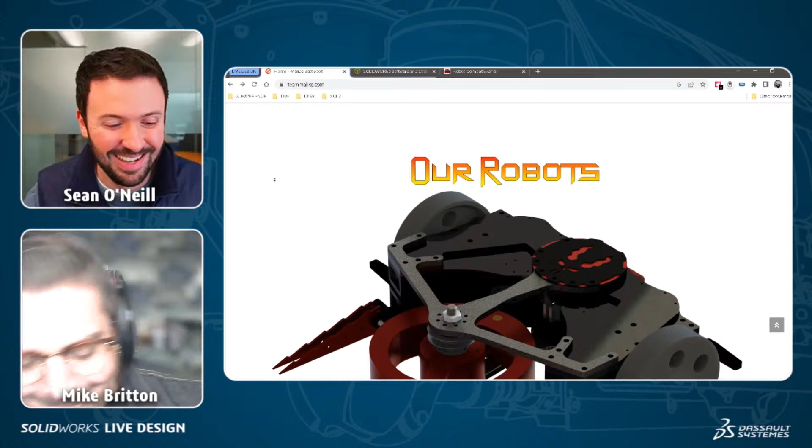Team Malice is just a really wonderful group of well-established combat roboticists. Our team captain, Bunny, she's unbelievable, and all the teammates are really great. It's an experience taking these tools that I use for work. I don't have a background in combat robotics. I was invited to the BattleBots TV show by one of my very dear friends to help turn wrenches and carry a 250-pound robot around. Which are both things I'm great at. But the first time I was on BattleBots, the Maker's offer came out during that time, and I started getting folks on set hooked up to it. If you can find people that share even one passion or interest with you, it's a wonderful time, and I just cannot gush enough over how lovely our team and leadership is.

Very cool, and that's you right here, right? Yeah, I'm in suspenders. I'm always virtually in suspenders. Teammalice.com, you guys can check that out. We have that in the chat there.